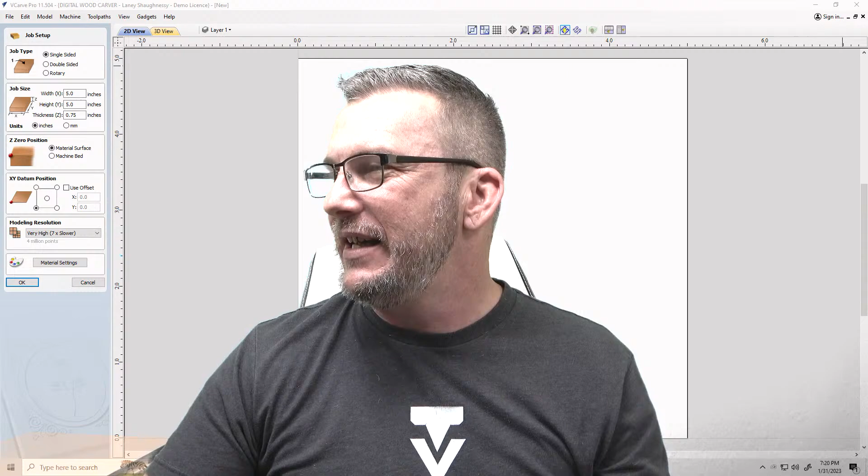So let's switch over to camera 2. Let's get me down in the bottom right hand corner, let's fly down here. Shoot, or left hand corner. Right? Left, yeah. No, left. Hopefully y'all can hear me, hopefully you're having a wonderful evening, and hopefully you get something out of tonight's class.

So right now I've got here on the screen, let's talk about the muse for this. So last week we did the 3 arts and crafts tables, how to kind of bring the vectors that were provided by Woodsmith in their CNC Base Camp episode. We brought in the vectors, and we talked about how to lay out the vectors and create all the fillets and things like that to create those tables.

And as I was looking at the Woodsmith CNC Base Camp, which is a good series, guys, check it out, it was referred to me by, is it Mike or Mark? Please correct me, it's been one of those days, forgive me. But it was referred to me by a customer, and when I was looking at the 3 tables, I saw this class, episode 6, this episode, on metal inlays.

Now the cool thing about the videos over there at Woodsmith and what they do is they're going to show a little bit of the CNC. They don't get into the design that much, but they do show some of the materials carving. And then they talk about the assembly of the project they're doing and how they worked with the metals and what they recommend, and things like that. It's good information.

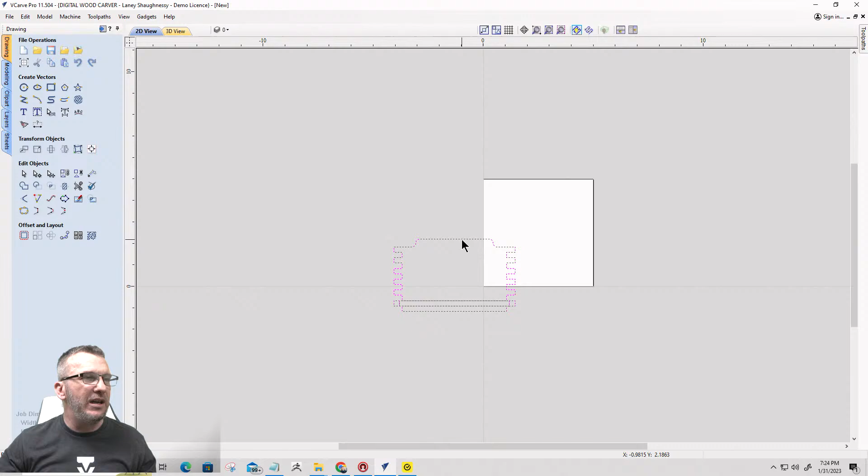But let's take a look at their file. So box 1, and I'm just going to move all their stuff over here. And let's import side 1 and 2. And then let's import their top 1. Oops, click the wrong button. Let's import their top 2.

And then let's import the floral inlay. And let's import the ginkgo leaves inlay, and the oak inlay, oak leaf. And then let's go ahead...

That's it. Let's go ahead and open up the PDF that you get as well, so you can see at least what the CNC Base Camp files provide you. You can see kind of what you get with those files, and they do a really great job of it. Let's bring this over onto the screen.

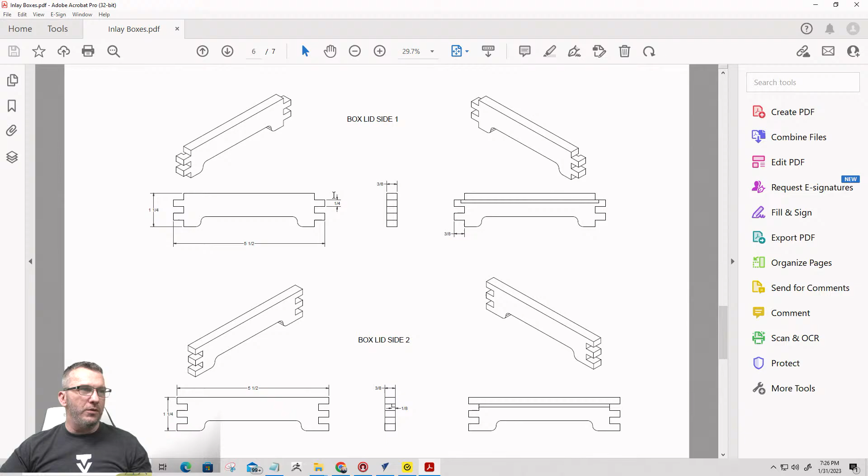And in the PDF, they show the box sides, for the different views, side 1 with their measurements, side 2 with the measurements, and the top lid 1 and 2 and the grooves and everything. They've done a nice job with the layout, the panels, the top and bottom panels. So they've done a really good job with this. And when it comes to the vectors and all...

On these finger joints and everything, where these joints are going to be fitting together, those inside cuts that we talked about in last week's class, we need to create those fillets. And they've got a nice way of hiding the fillets, in some ways.

But when it comes to finger joints, there's not much in the way of hiding it that we can get. When we go to do the joinery and all, I think because Woodsmith's got a combination, they work with hand tools and their CNC, they don't just let the CNC do it all. I have not watched the video, I'll be the first to admit that. It's been kind of a backed up time. None of the parts came in, none of the router bits, and I almost thought I wasn't doing this class. But I'm assuming that they've gone in and cleaned up the fingers and everything and squared them up.

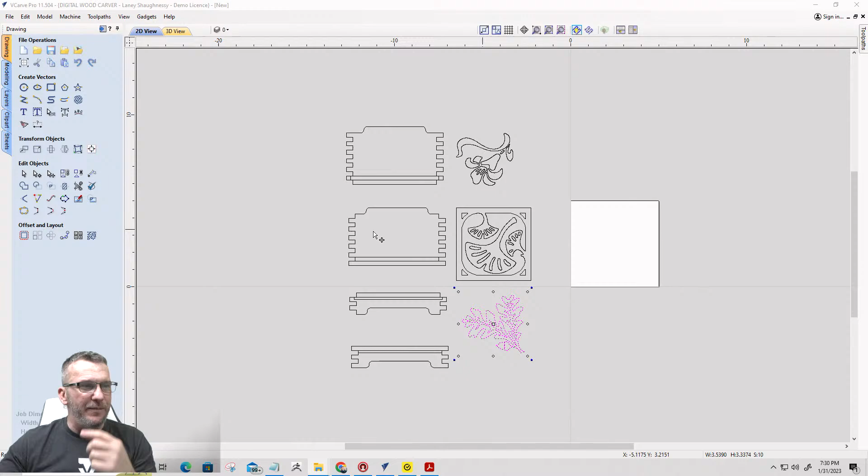Buckle up, ladies and gentlemen. We're going to be doing inlays, but if you want to see what they've cut and how they put their box together and their discussion on the box, watch episode 6. The link is in the description of this video, the link to their tutorial and these inlays. But we're going to start with our own project, because I don't want to just regurgitate what they're doing every week if I'm working off this. I want to give you the same tips and tutorials, but our focus is the inlays, and I want to put the inlays in a really nice box and take you through that.

Brooks Martin says he used a router to round over the fingers. Good. Okay, there you go.

All right, so watch that video on episode 6, and let's go through and create our inlays and our box and everything, and let's go from there.

So what I would like is, I've got a project set up here. We're going to go 5 1/4 by 5 1/4, basically kind of a 1 by 6, but I'm not going to just run down to Lowe's or Home Depot and do it in oak. I'd like to have a nice walnut box, round fitted lid box. I'd like to have a nice accent strip - maple, I kind of like the contrast of maple and everything. On the lid itself, we'll discuss the metal we're going to use for the inlay. I'm going to come out with a 5 1/4 by 5 1/4 diameter setup here, and 3/4 inches thick.

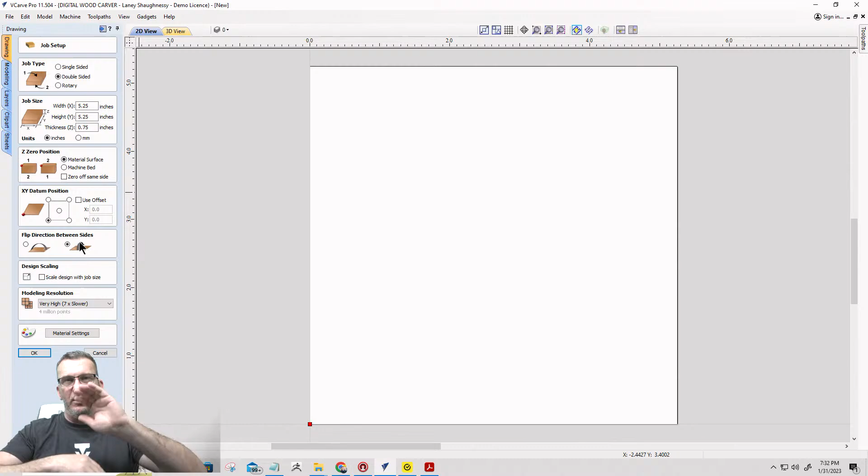I'm going to be working off the material surface, but it's going to be a two-sided job. Not all of the parts are two-sided, just the lid. The lid's going to be two-sided because I'm going to be carving the fitted pockets and the lip on the bottom side of the lid, and then the inlay on the top side of the lid. I am going to reference off the material surface for each side, and I'm going to start in the bottom left corner. When I flip my boards, I flip them along the y-axis - that's going to be my job setup.

Now the first thing I'm going to do is lay out these, and I'm going to move them to a brand new layer. So right click, move to layer, new layer, and I'm going to call this Woodsmith box. Click OK.

Don't be disappointed that I'm not working with that exact Woodsmith box with all the joinery. It's a very basic finger joint box. You can either clean up the inside of the fingers or do fillets. There's not really a lot to it. I want to take you through these as lessons, in when you import vectors and what needs to be cleaned up. Those inlays, there was nothing that really needed to be done with them. So don't be disappointed, because we've got a lot to go over and we're going to learn something in this class.

So we're going to start off with a 5-inch diameter circle. Notice on the screen I just put the mouse in the center of the board, and I've got smart snapping and geometry snapping on. So I got these crosshairs when I was at the center, showing me exactly where center was, and I could left click and drop that there.

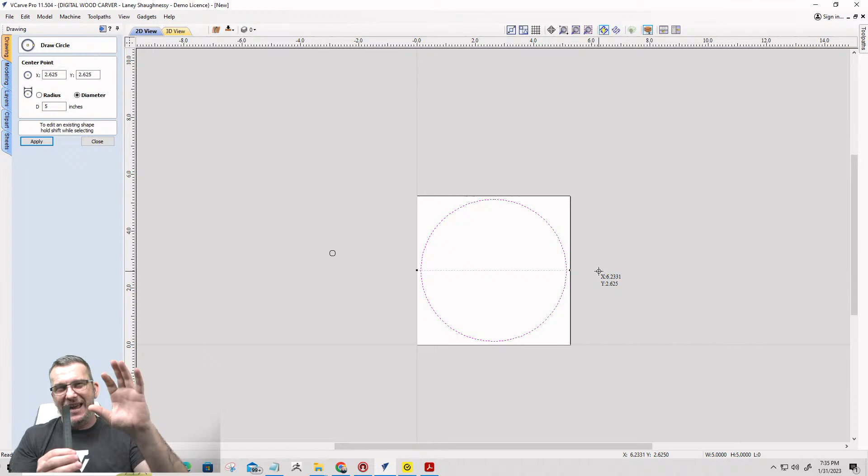So I want my box to be 5 inches in diameter. It's going to be kind of like a tubular round box with a fitted lid. I've got a little ruler here, and I'd like the box to have some depth to it, so it can store some stuff. I'd like the box itself to be between 3.5 and 4 inches deep.

And I would like an accent ring, if you will, in there of a different species of material. I'd like to have an accent ring and everything that I think would look good. So this is going to be kind of the layout of my box.

Now, on the box here, the inlay - I'm going to work my lid first, kind of get the lid and all the vectors laid out, and then we'll start creating the necessary vectors for the others. Because on the lid, the lip, inside my 5-inch diameter box, I'd like to have a pretty decent wall thickness.

Not too massive, but not too flimsy. So I'm going to offset inward using the offset tool, 3/8 of an inch. In a sense, my walls, once it gets pocketed out, are going to be around 3/8 of an inch thick - not too bulky, but not too thin. For me, I think 3/8 is a good number.

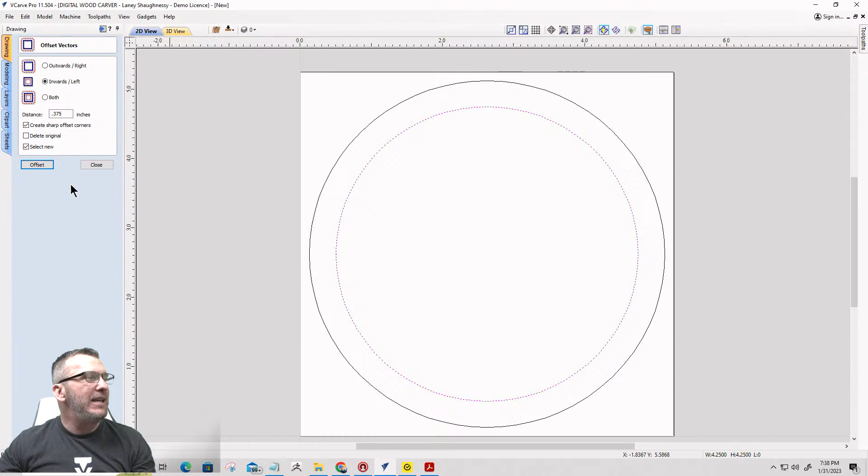So we're going to go 3/8 of an inch on our wall there, and now I'm going to import the vectors that I want to use for the lid. And I've got some vectors.

I've got some vectors here called floral pattern vectors. It was from seeklogo.com. If I open this up, we have these patterns that I liked. I'm going to move them off to the side and we'll focus in on them. I know it's hard to see with that dark gray background, but...

I've got these patterns that I want to choose from, and for my round lid box I've got multiple ones and things. The one pattern I want to work with tonight is this one here on the bottom right hand corner. Now these are already vectors, and they were free from online at seeklogo.com. They have a bunch of different stuff you can type in and search for vectors, and I basically just typed in floral pattern vectors.

This was one of the many options, right? And I like the different patterns because any one of these would fit very well on a rounded lid box. So the aesthetics and everything, any one of these would fit on the rounded lid box.

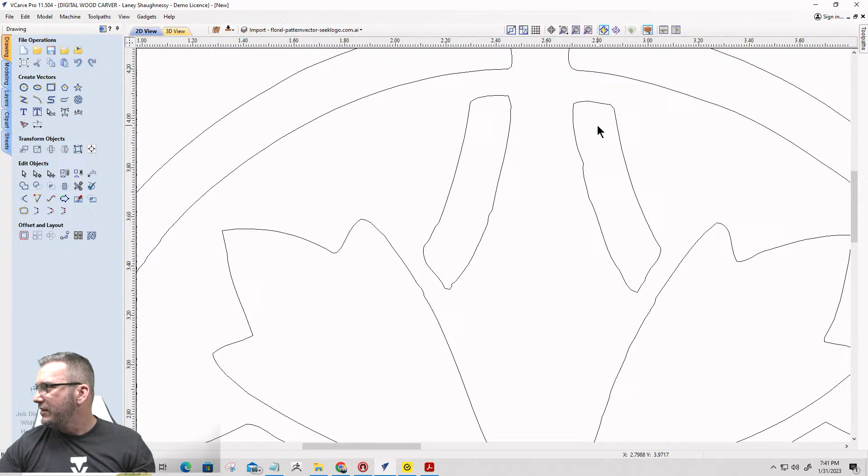If we zoom in on this, and I'm going to really get up close and personal, but if we start to really inspect the lines, they are not by any means the best looking of vectors. There's not really anything smooth or clean about them. They've all got issues and things like that, humps and bumps and all that wonderful jazz.

Hey, Big Daddy Fish, how you doing, buddy?

So our first lesson is we're going to clean these up, recreate what we need to recreate and things like that. And I'm going to show you some ways that we can do that. Cool beans. All right, so let's look at the first things.

First, let's look at this main circle out here. The first thing I want to do is take a measuring tool, a measurement, based on my current size right here where I'm at. If I measure, I'm going to just grab a point somewhere and measure best of my ability straight down, just to get kind of what my distance is, you know, 0.1567, roughly around there.

Now, what I want to do is recreate this, if you will. So I'm going to add a new layer. This is where layers comes in really handy. Since my vectors that are currently here right now, I don't need to change or set them or do anything with them just yet. In just a second, I'm going to lock my main layer here so that I can't move the vectors or disturb them in any way while I'm working on the new stuff.

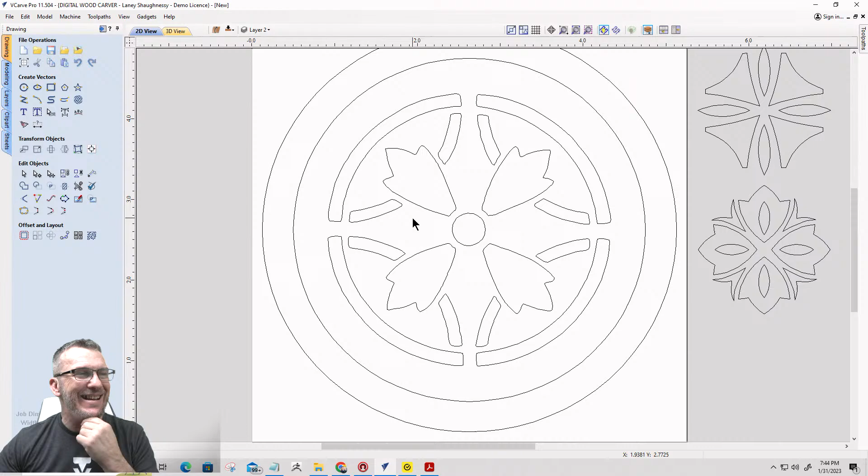But that way I can take this object here, and I'm going to pretty much start from scratch, if you will. I'm going to lock my main layer. What that means is, let me get everything on my main layer, let me lock that.

I can't select anything on that layer—it's kind of protected from me moving it. So I'm going to be working on layer 2.

The first thing I'm going to do is open up my draw circle tool. Hang with me, guys and girls, you're going to like this, it's a good lesson. I'm going to take my draw circle tool and snap straight to the center of my project, since everything is centered, and drag a box out to the main circle.

Now if we look here at the line I dragged that to, you can see the original pattern just wasn't symmetrical—there wasn't nothing straight about it, right? So this is why I'm kind of recreating it, if you will.

Now, remember I took that measurement earlier—it was 0.1567 and all that stuff. I'm going to do an offset of my circle. Hopefully you can see that red circle there. I'm going to offset the circle inward by 0.1567, kind of bringing it in that same distance. I want to keep the same kind of feel for it, but bring that in. All right, cool beans.

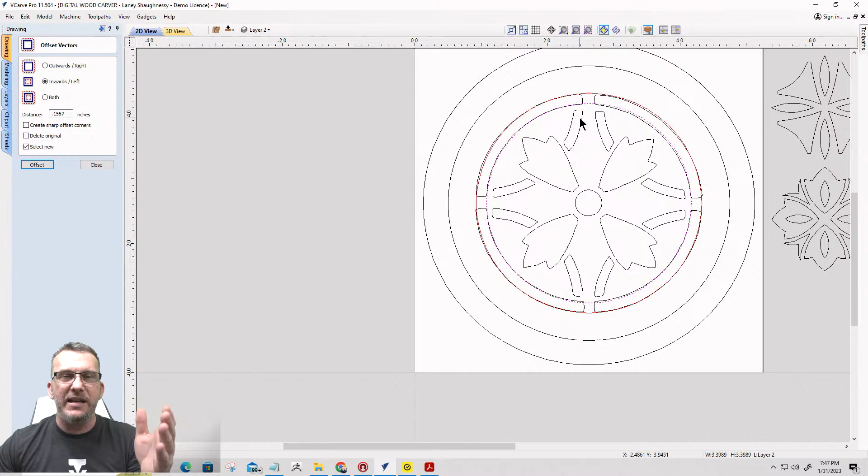But I want to create the same feel, if you will, using rectangles. So I'm going to come in here, use a rectangle, and draw it all the way straight down here with square corners. Corners don't matter because we're going to be using the scissors and trimming and all that stuff.

And I'm going to hold my shift key down and size this down to roughly where it's right about here—just get it about the same size, that same gap, if you will.

Now I'm going to make sure that rectangle is centered left to right. I'll go to the alignment tool and make sure it's centered left and right—it was off just a little bit. So now it's centered, and then I'm going to hit copy and paste.

So copy and paste, Control C, Control V, if that's your thing—keyboard shortcuts and all that stuff. Currently the new copy of that rectangle is the one selected, so I can hit the number 9 key if I want to go clockwise, or the number 0 key if I want to go counterclockwise.

Let me say that again: I can hit the number 0 key to go clockwise, and the number 9 key to go counterclockwise. I'm going to rotate that part—hitting the number 0 key twice. That's going to turn the copy 90 degrees.

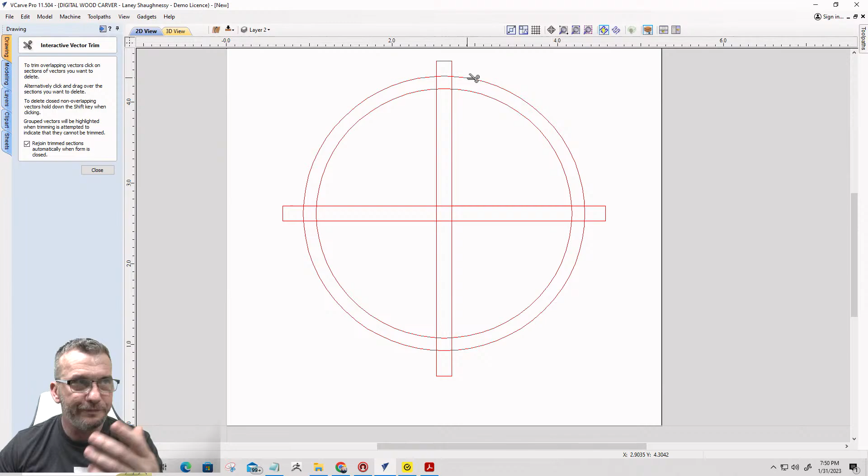I'm just going to come in and start trimming. I'm going to trim there and there, come over here, trim, trim, there and there, down here, trim, trim, and side to side. Trim, trim, side to side. And so what I'm left with is essentially that shape, if you will.

Now, each one of those shapes originally, the corners of the part were nice and filleted. We could do a couple of things with the ends here. In node editing mode, we could turn that into an arc and pull it out so it's kind of a rounded end, but I don't want to do that.

I just want to put a nice little fillet on there, give it a nice little rounded edge. So I'm going to go to the fillet tool and see what a 1/8 inch normal fillet looks like. Way too much, way too much. Let's go 32nd, 0.03125. Nice, so a 32nd.

And I'm just going to go through and add that little fillet to all of the sharp corners here. I'm doing this now because why draw what you can copy and all that good stuff. We'll talk about it in just a minute. So, nice little fillet, normal fillet, right?

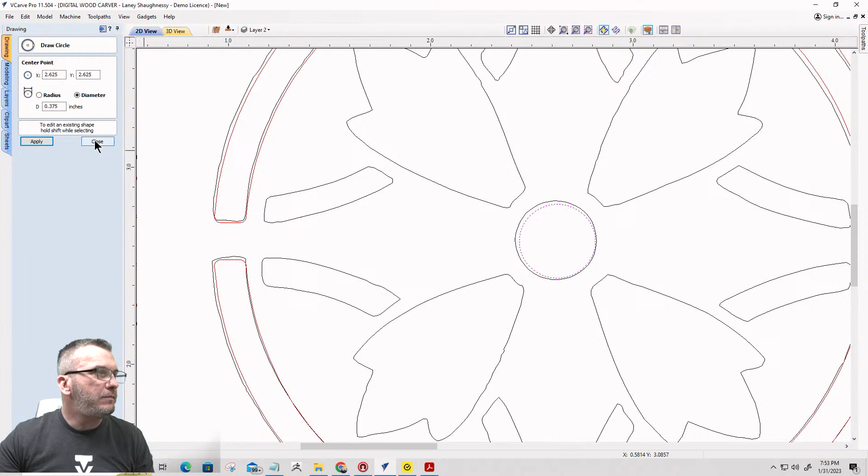Is that a word? Is that a technical term, cattywampus? But it's not centered itself, so I don't care about that. My circle is centered. I just want to get round about the same size, and it's showing about 0.385, and I'm just going to go 0.375, about 3/8 there, and it'll be good. And again, I can't select anything else here, so I'm just going to leave that be.

Now, on these remaining parts here, these arcs and stuff, and the leaves, we'll talk about the leaves last. But are you guys doing okay?

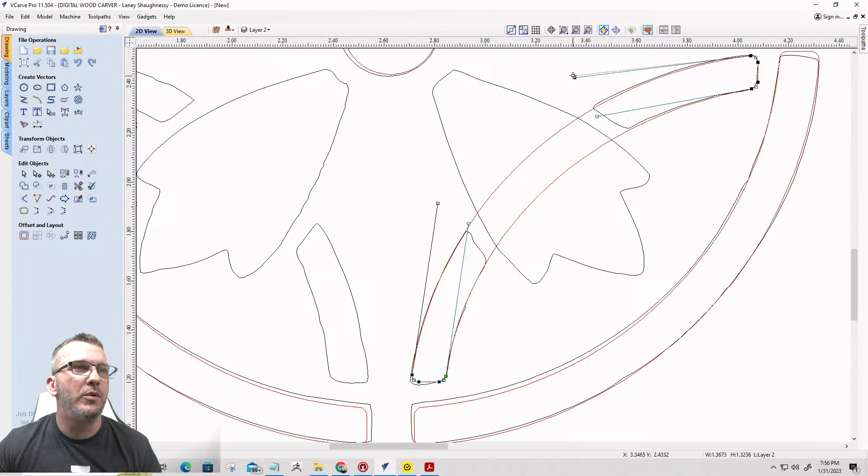I could come over here and move those over to get them somewhat in line. And then take these anchors and pull this down to there and pull that down to there, and I have that shape, or a very close simulation of it. Let me get this one pulled up just a little bit like that. So I have that shape and all.

So that's one way. We could have done that. No big deal. But thank you for that. Thanks, Roger. I appreciate you, Roger. All right.

So that's one way to create that shape. Now, second way, way number two, let's go with our arc tool. I'm going to click, pick a spot here, come all the way over and around about in that same area, click a spot.

And then I'm going to pull this up to a nice kind of shape that pretty much simulates that shape there. Okay, we with me? You with me? All right.

And then I'm going to offset that inward. If I go into node editing mode, by the way, left is here, so I would actually be on the inside left. So I'm going to be going inward, offsetting inward. And outside right would go to the right here during the offset. So I want to offset inward that same distance.

It's not quite that 0.1567 distance, but hey, we're recreating it, that's okay. I can back it off a little bit, so I'm going to undo that and I'll just go 150, and I'm pretty darn close there.

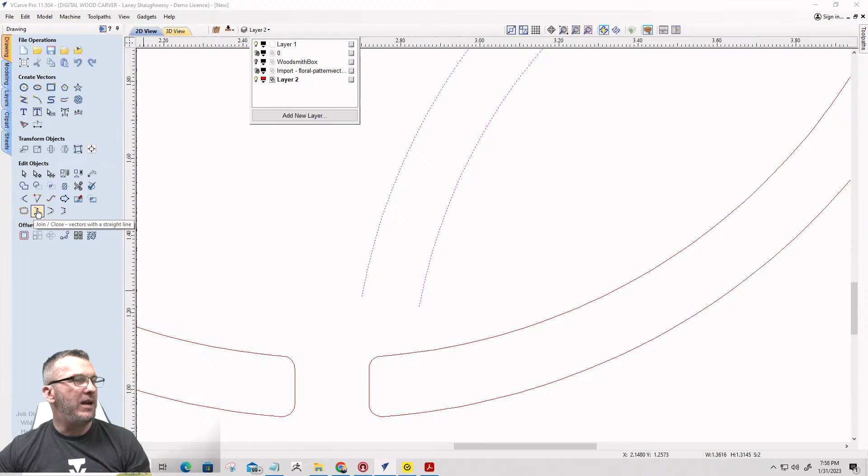And now I'm going to select both of those shapes and join them with a straight line. Let's turn off this layer so you can see what's going on here. So I've got this shape here, I'm going to join it with a straight line. Once, twice, click it twice so it joins on both sides.

And my fillet tool, that 0.03125, I'm still going to use the same fillet, and I'm going to throw that in there. Whoa, now notice when it did that - wow, and everything. That's because when I joined here on this join, it's got a bit of a funk going on there.

Let me do this side. There we go. Let me zoom in on this corner here, get right there, and that way it pulls up. When I was out further, I was kind of more hitting, instead of right on the corner, hitting the node over here, and it was just doing something wackadoo.

Undo, Control Z, and go through to try to figure out if it's an open vector or what it is. But in this case, what I had to do is zoom in to get really right on - let me undo this, Control Z - to get really right on that corner. I was over here and everything, and when I did that, it was throwing everything wackadoo.

So make sure you get right on that corner, get that little check mark and everything to get that radius that we want. Okay, cool beans.

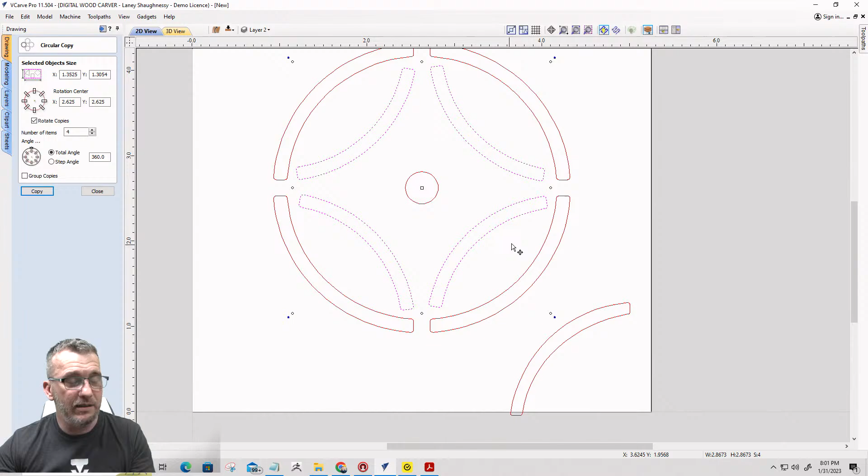And hey, that's good. So we can undo that. Come in here, what if we go into our layout lines? Let me snap to the end of this, and if I were to rotate, I don't need my layout lines for this. These are a little short, no big deal.

Let me get a measurement. Length from here to there, 0.0893, and from there to there, 0.1232. So I need to extend 0.0893.

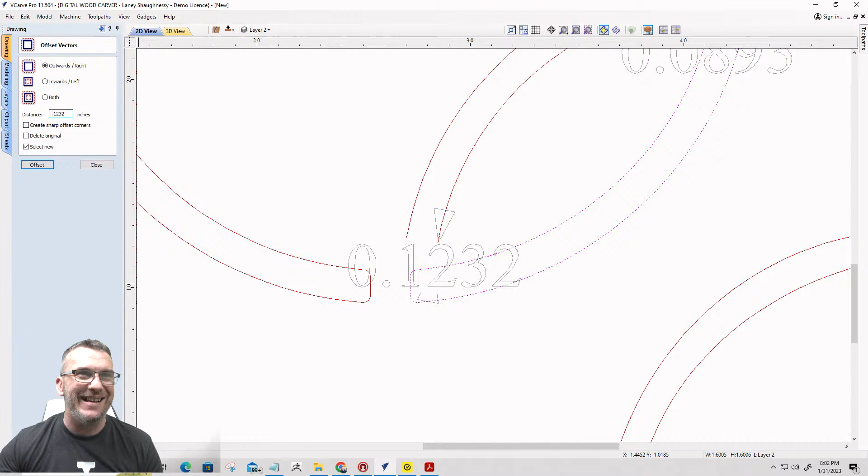Let's do an offset. Let me put my math number back there. I'm going to do an offset of this part, offset outward 0.1232 minus 0.0893 equals, and offset that to there. And then I'm going to take my extend tool and extend that line to there.

And if I were to rotate, bear with me just a second, I'm going to rotate this part. Give me just a moment. I actually want to go a little bit wider than that by row, so let's offset that outward. I'm going to go 3/8, 0.375. Whoa, that's way too much. Give me a second. Let's go 0.125. That's good. All right.

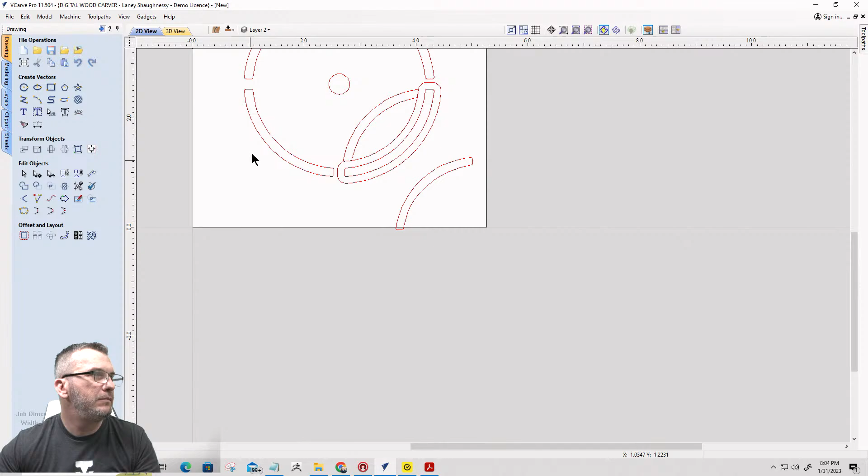Alrighty, Aphrodite. All right, let's go in with our scissors and trim, extend, delete, join with a straight line, 1, 2, fillet tool, 1, 2, 3, 4. Wrap it around the 0, 0. Okay. Better? Is that good?

Good. Cool. All right. Now, what James is throwing out there in the chat is he's saying take a circle from the center, and I could bring that circle out to the edges. Here, let me snap to the edges. I could bring the circle out to the edges to keep my symmetry.

So let's do this, right? Trim. So we can come in here, size this circle down just a little bit, take our scissors, trim that away, that away, that away, that away. Trim that, and that. That, and that. And that, and that, and that.

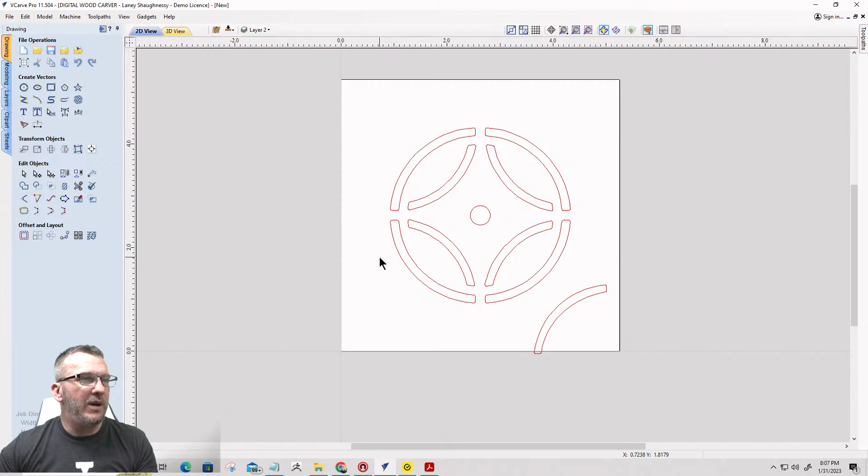All right, all these little tips, lots of ways of doing things, you know, and there we go. So we still copied around. Done deal. Okay, now let's turn on our layer again.

Okay, now we have these kind of leaf patterns, if you will. And from these leaf patterns, our little shapes are trimmed back away from that. I'll show you how to do that too, it's just an offset and all that good stuff.

Now, your little leaf shape, whatever you want it to be, can be anything that you want. For me, when I'm approaching design, and if you've watched any of my classes in the past, especially the Maltese cross, I look at everything as what shape would I start out with to create the shape I want. In this case, I'm going to start with a rectangle, and from that rectangle, with some node editing, I'm going to end up with this kind of floral pattern. It doesn't have to be exact, but close. Excuse me, I had the hiccups for a second.

All right, so what I want to do with this is use the circle tool. Remember that back layer I keep turning on and off, it's locked, so I can't mess anything up with it, and I don't care if I mess it up. It's not that pretty, that's why we're redrawing it. I just want you guys to see it's not the end of the world if you can't find the perfect graphic. Get close enough, spend a little time and clean it up. We're going to have a really nice inlay graphic that's going to look great as metal. We'll talk about the metal in just a second.

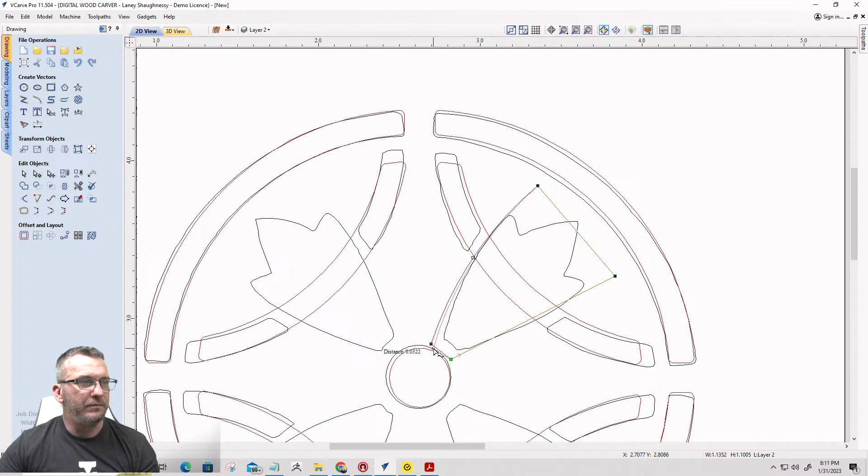So in node editing, I can take a span and turn it to a Bezier curve, or turn it to an arc, whatever the situation calls for. In this case, I'm going to turn it into an arc and pull that arc back. It likes to shoot out into no man's land when you turn something into an arc, and you just got to tame it, bring it back in. But I'm just going to pull this out, kind of get that arc shape going on here.

Now I'm going to show you a cool trick. I'm going to kind of focus on one side of this, again for symmetry, and then I'm actually going to mirror that over to do the other side, so it's a symmetrical part. Or if you don't want it to be symmetrical, you want some differences, it can do that as well. But I'm going to focus my attention on this top half here.

So from here, I'm going to pull this node down to here. I'm going to insert another point here, right click and insert a point. I'm going to pull that there and turn this into a bit of an arc, not that dramatic, and pull that back.

Then I'm going to come over here and put in a point and pull that down to here. I don't care, everything is kind of straight lines right now, I'll go in and smooth everything out in just a moment. I'll show you how to do that.

I'm going to come in here, grab, insert a point and pull that up to here. And then from there, right click and delete the span. Hold on, let's try that again, delete the span. That separates it from here. And I'm also going to delete the span down here, so I'm only working with this half. So we'll get rid of this line for right now.

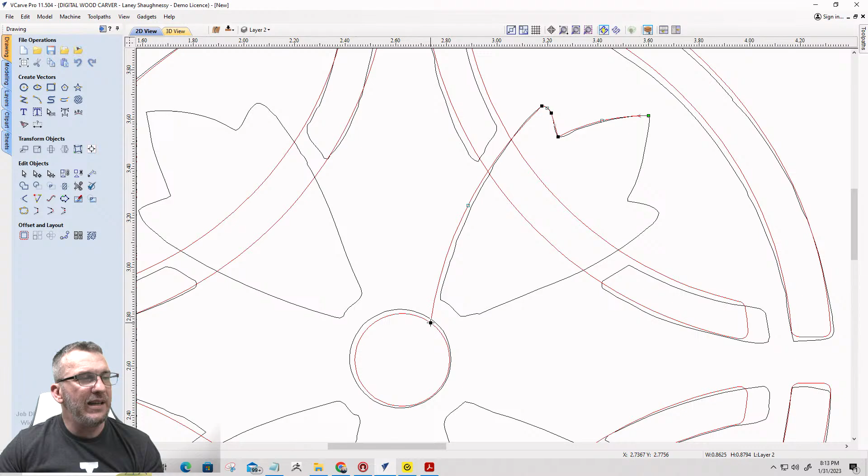And again, not so dramatic at all. I'm leaving this intentionally long down here, but I want to kind of start. Again, we're working with bad lines, cleaning them up, so don't try to match them exactly. That's not the goal. The goal is to make it better, right? So I just want a nice arc, a nice flow to this leaf and everything. Now right here, got kind of a bit of a hard spot.

I can select these nodes and hit the letter S on the keyboard, and I believe, is it S? Hold on a second. What is my keyboard shortcut? Bear with me for a second. It is S, the letter S, but it is not... why it's not letting me deal with that.

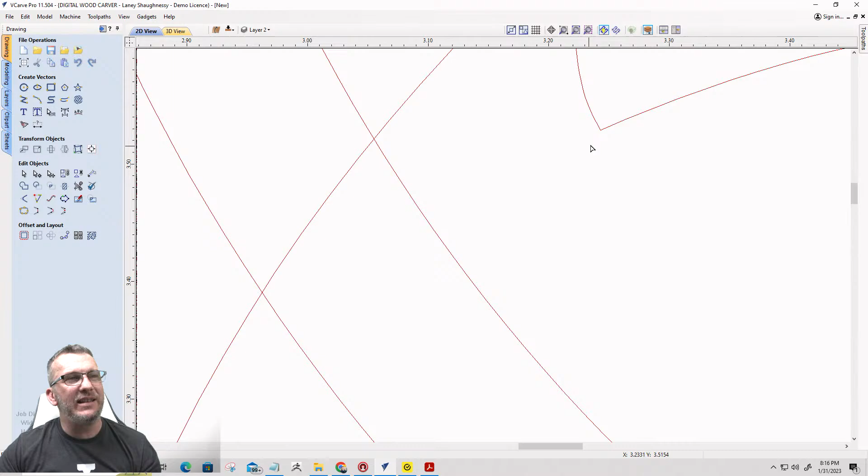But I can hit, when I have the nodes and everything, generally I can select all the nodes and hit the letter S on the keyboard and it'll smooth them out, if I wanted to do them all at one time, which it just did. I don't want to do them all at one time. I want to do this one a little bit, I want to smooth that a little bit. Don't want it to be so, oops, I hate when I do that. I don't want it to be too thin here, so I want to give it a little bit of thickness. Okay, all right, so I just want a nice little flow, if you will.

Okay, now I'm going to come in here and I want to mirror it, right? But how do I want to mirror it? Well, I want to mirror it about a line. Are you guys and girls still with me? Wake up. All right, cool beans. We're going to start from the center, and I'm going to draw a line, you know, 45 degrees.

And I'm going to take this shape, I'm going to select that shape, I'm going to select this line, and then I'm going to go into the mirror tool. And I'm going to click the button that says create a mirrored copy, and then flip about line. Right? Okay, create that symmetrical half in there and everything.

Now that I've done that, I can go ahead and get rid of this. And up here, these two parts, I'm going to join them with a smooth curve just to finish off that little point. It's not the prettiest point in the world, but it will... that looks worse. Bear with me. There we go.

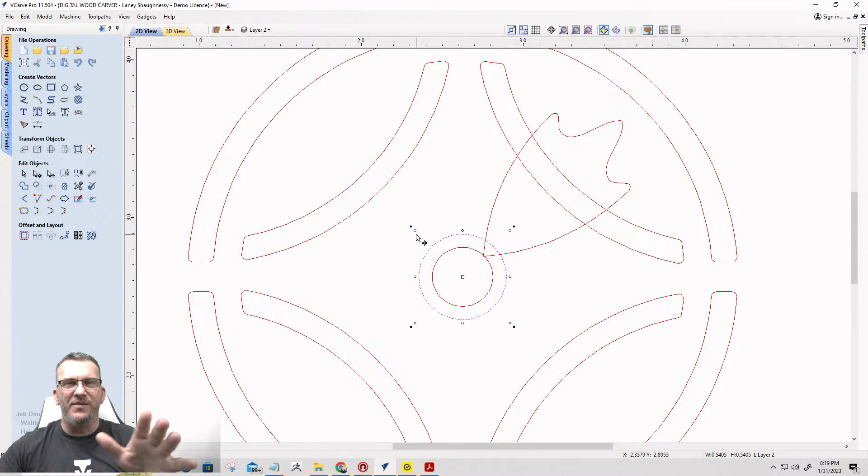And don't let go like I just did. Don't let go prematurely. Hold that control and shift and drag that out. Let go of that mouse first before you let go of your control and shift button. But I'm just doing kind of an offset, no particular rhyme or reason, just add a little offset there. And I'm also going to do an offset of this guy. So I'm going to offset outward, and let's see what an 1/8 of an inch offset looks like. That is a little bit too much for me. Let's go a 1/16, half of that.

I'm going to be happy with a 1/16 inch offset. Now, I'm going to take this shape, just that one, and rotate it around 4 times using the circle copy tool. I want to copy around the center of my part 4 times, and copy that around. With me? Cool beans.

Here, and here, I can manually do this. I'm going to show you the way to automatically do it with the trim tool, but you can also manually do it with the scissors. I'll show you both ways, starting with the trim tool.

So I can select this shape, this, and this, and group them together as one, right? And I can select... let's not do that, let's do one at a time. I can do this shape and this shape, we're going to do them one at a time.

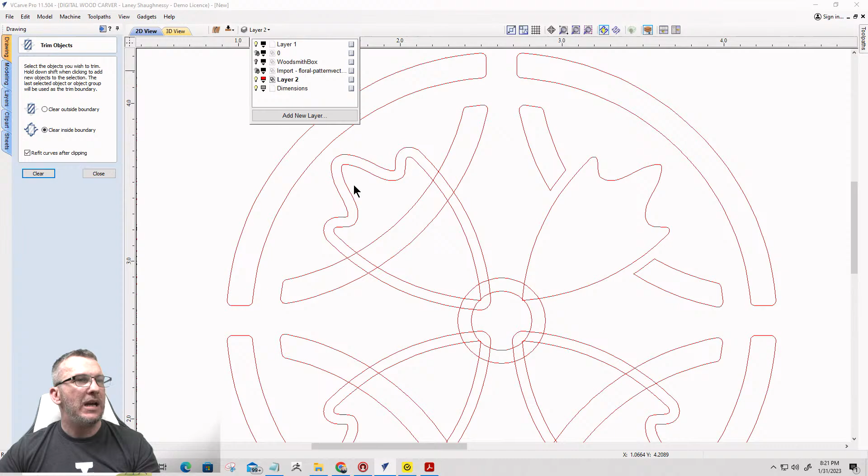Here, select what you want to trim, the boundary you want to trim last, and clear inside that boundary. And then, of course, we don't need the boundary anymore. So that's using the trim tool.

I can also obtain that same thing by using the scissor tool. With the scissor tool, I can come in here and trim, over here trim, and then get rid of the stuff that I don't want. Same vibe, right? Once again, trim away what I don't want.

That kind of thing. Just make sure that you get rid of, if you're using your manual trim tool, your scissors, get rid of everything that doesn't belong. Okay? Good, we good there?

All right, now in here I will use the trim tool. What I'd like to do is just cut off these points here and get that around. I want to create that little arc right there. Get that tip out of there too.

Trim that away. Get rid of that tip. Trim those 2 lines and the big line in between. Get rid of that tip. Get rid of this line and that line and those 2 edges.

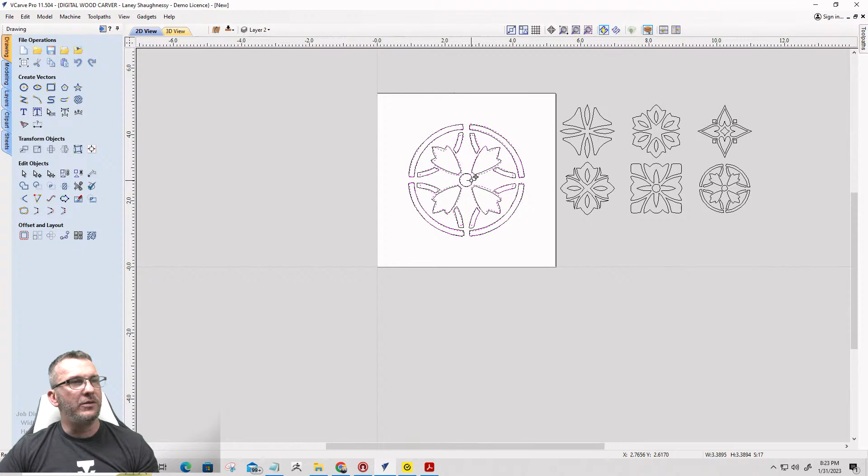I'm going to take our... remember I can't select the original, but I can select what I just created. If we look at our original versus what we just redrew, much cleaner lines and smoother, all that good stuff. The red is the one we just drew.

So not too difficult. Our leaves don't look 100% the same, but that's fine. I've got a little bit more flow in my leaves, a little bit more curve in my little flowers versus these hard cornered lines and stuff. But that's what we just created.

Cool beans. Okay, let's go ahead and get past all that stuff. Lord have mercy. All right, so now we have our new inlay.

Don't both spans around nodes have to be Béziers to smooth? I don't know if that's the case. What someone's asking is, on a span, if I go into node editing mode, I have a straight line here, straight line, and it allows me to smooth that point there. It turns that into a Bézier curve on both sides when I smooth that point. So to answer the question the way you asked it: do both spans around the nodes have to be Bezier curves? No, they turn into Bezier curves. When you're smoothing, that's what you're creating. You're not creating arcs, you're creating Bezier curves. But they don't have to be that way to begin with.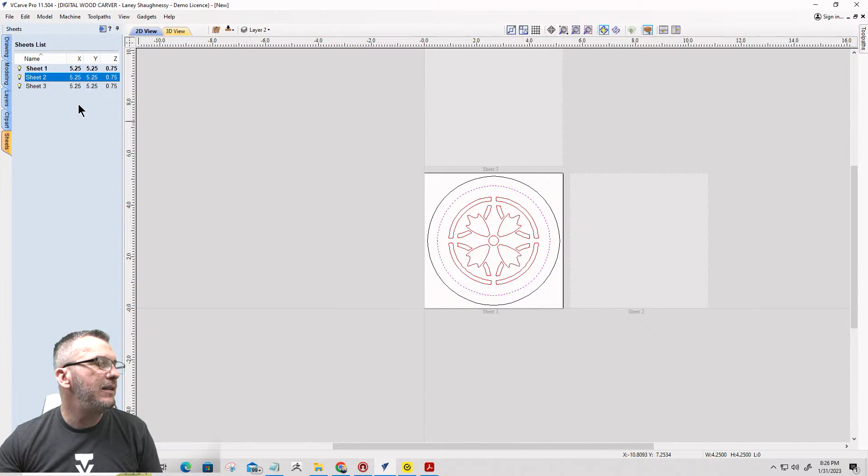Now I'm going to set up multiple sheets here. I'm going to set up a new sheet, sheet 2 and sheet 3. Sheet 2 is going to be a 1/4 inch thick. I think a 1/4 inch will look good, and it's going to be my accent piece of wood.

So I'm going to cut out that accent piece of wood that's going to get glued. You know, I'm going to have my base. I'm going to have that accent piece of wood ring, the ring. Then the top, not the top, not the lid, but the top of that, they're going to be glued together. So I have that nice accent piece and everything.

And then I'm going to have the fitted lid, right? So I think the ring, I think it's going to be a 1/4 inch. Yeah, okay.

Basically, let's come back into here. These two shapes here, they're going to get copied to sheet 2, and they're going to get copied to sheet 3.

And I'm going to designate sheet 3. That's going to be my bottom, the actual base of the box, right? The bottom part, right? So I'm going to rename that to the box bottom.

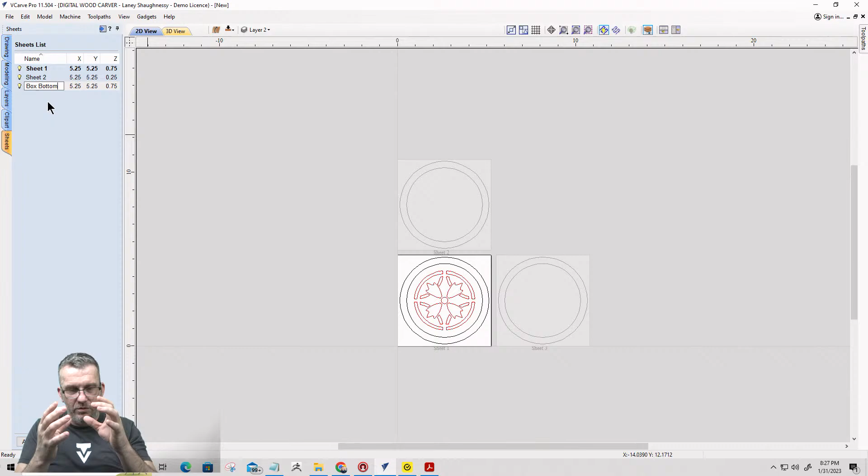I need one more sheet. One more sheet, so I'm going to add a new sheet. This is going to be my sheet 1, it's going to be my lid. So we'll rename that to lid.

Sheet 2 is going to be my accent ring. Sheet 3 will be renamed to my upper tier, upper level, upper part of the box. I'll just call it upper tier. That's fine. Yeah, I'll know what it is.

Now on my upper tier, so 3/4. Then I'm going to have an accent ring, and then I'm going to have another piece on top of that, and then the lid on top of that. Now, the other piece on top of the accent ring, do I want it to also be 3/4 so that way my ring is somewhat in the middle of the box? I think that would probably look more aesthetic.

I kind of almost want the ring to be a little bit higher, so I'm thinking about the upper tier being a 1/2 inch thick piece of material. Let's do that. So the upper tier is going to be a 1/2 inch thick.

And don't worry, ladies and gentlemen, if you don't have planers or anything like that, your CNC does surfacing. But also on your cut, you can surface or pocket down, in this case, a 1/4 inch, and then cut your parts out, right? And it would be a 1/2 inch piece when it's all said and done.

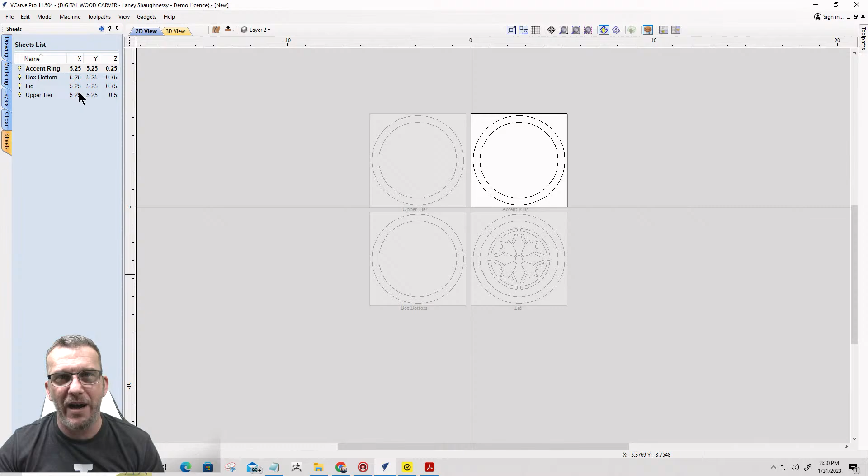Okay, very simple pocket cut. Bottom of the box is going to be our pocket cut here, and we're going to go pocket. I'm going to, it's a 3/4 inch piece of material. I'm going to pocket down a 1/2 inch and leave the bottom a 1/4 inch thick, right? So 0.5, and I'm going to use a 1/4 inch end mill.

Do it as an offset, be a nice clean cut and everything. I don't necessarily need a bowl and tray bit or anything like that. I don't necessarily need the rounded edges at the bottom of the box. All this is just going to be a container, you know, a container with a lid on it, right?

And I'm looking around like I have something that would be similar, but it's not like a bowl or tray. I don't need a special bowl and tray bit or any of that stuff. I'm just going to have that pocketed out. So this is going to be my bottom pocket, 0.25 end mill.

Okay, all right, we're going to do the lid last because it's a 2-sided project and everything. So, and it doesn't take long. We're about to get there. Tonight's not going to be a very long class.

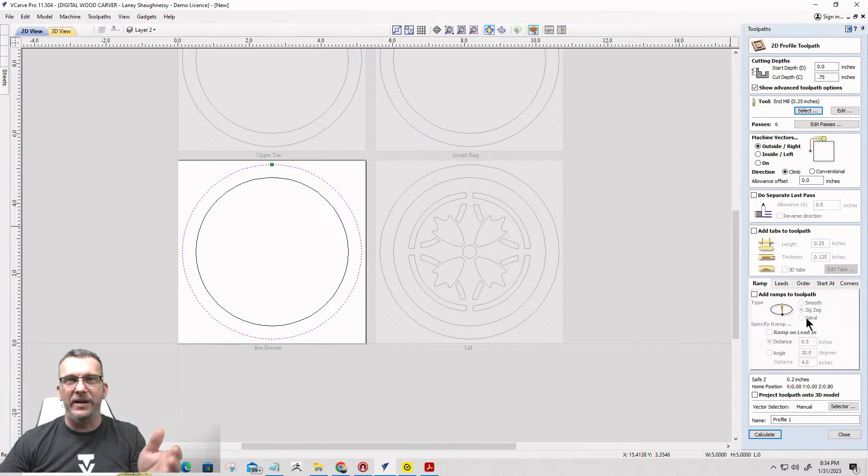Don't have a feed rate of like 100 inches a minute with a plunge rate of 10 inches a minute. It doesn't work, because then it'll stop and stop. It needs to be a nice, smooth funnel, if you will. So have your feed rate and your plunge rate the same thing, and it's going to drop slowly as it goes around until the part's cut out.

I'm not going to do any kind of ramp right now. This is just a simple cut for me, so we're going to go profile, cut out.

And I'm going to put the word bottom on there, even though the sheet's named bottom. It's also a 0.25 end mill, so those two toolpaths can get saved together, and they can get cut out. So that's going to be my bottom ring.

Now let's go back over to the sheets real quick and let's change that. We're going to rename that upper tier, and we're going to call it our upper ring. Thank you again for that. Upper ring - that makes sense because I have an accent ring there.

And then the bottom, it's the box bottom, but it's also the bottom ring - it's not really a ring because it's not through, so we'll leave it at box bottom. Very good. Now, this will be our box bottom.

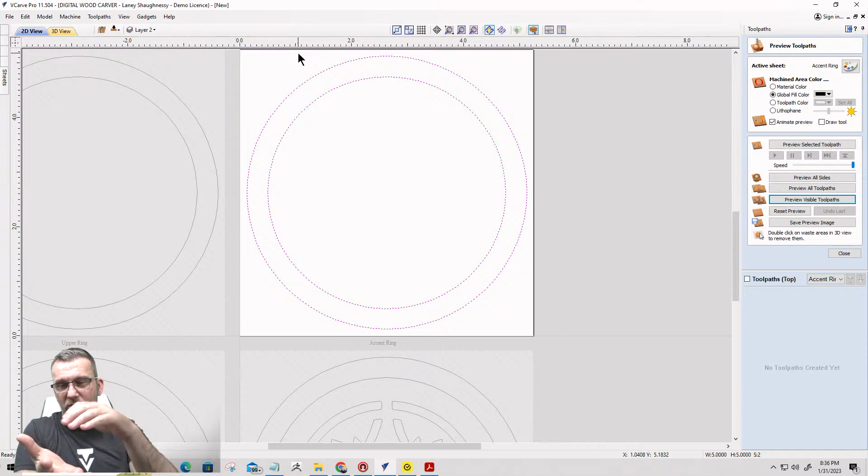And I'm using 2-sided tape, so the software is pretty smart. Now, I did a pocket cut because that one wasn't cutting all the way through. This little 1/4 inch ring is cutting all the way through.

Now, I have an outside vector and an inside vector. I'm going to do a profile cut on both of these vectors. It's only 1/4 inch thick, so I'm cutting 1/4 inch deep, and I'm cutting on the outside right of the line. I'm choosing outside right because that's what I need the bit to cut on the outside right of this profile. But the software is smart.

It knows that there's also an inside ring, a vector inside of a vector. Therefore, it's going to reverse that cut for the inside vector and cut on the inside of the line. So I don't have to create 2 separate toolpaths, one for the outside and one for the inside, and I don't have to choose 2 different options. I just need one toolpath, profile cut outside right, and for the inside vector it'll cut it but reverse that cut and do an inside cut. So when we calculate this toolpath, this will be my accent ring.

Profile cut. Let me get rid of these spaces, backspace, and 0.25 end mill, 0.25 end mill.

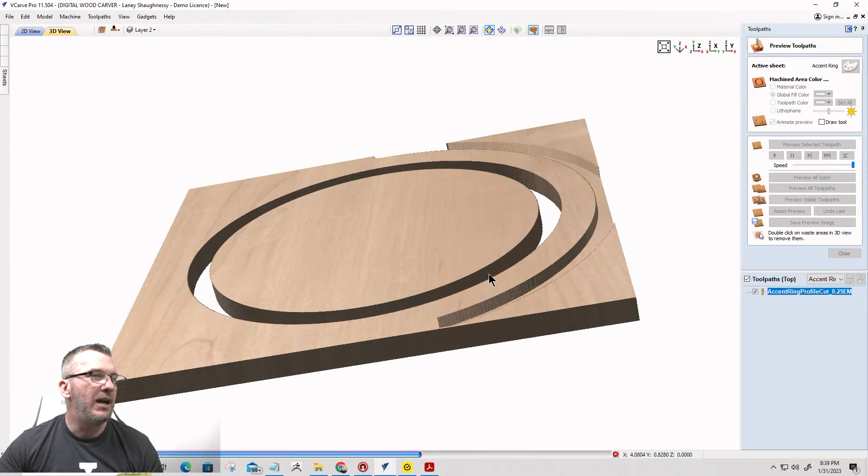If we go into the 3D view here, profile cut, preview the visible toolpath, which is right there. And that's going to just cut out. And again, I have double sided tape, so I'm not worried about tabs, and I don't want to be dealing with tabs. And also simple box, but it's going to be a nice looking little box, a nice little heirloom box.

Who knows, right? But that's going to be my accent ring. It's going to be maple, and I'm going to have a really dark walnut, and it's just going to be a nice accent ring. Now, you really want to get fancy, right?

We're talking about metal inlays, okay? What if I wanted a nice thin metal, it's going to be 22 gauge. We'll talk about that. And while I'm mentioning metal, let's look at the resource. One of the resources for the sheet metal, the metal goods, is Rio Grande, riogrande.com.

It's a jewelry supply house. And the sheet goods they have are silver, gold filled sheets, copper, brass. They have other metals, some unique, other metals and stuff. Then they have strips, and then they have foils, foil leaf and everything. I ordered some silver sheet, copper, and brass for these projects.

And I believe that my box is going to have, I'm going to do the silver on the lid. But if we open this up, riogrande.com, okay, that's one of the resources. They have the sterling silver, they have different types of silver.

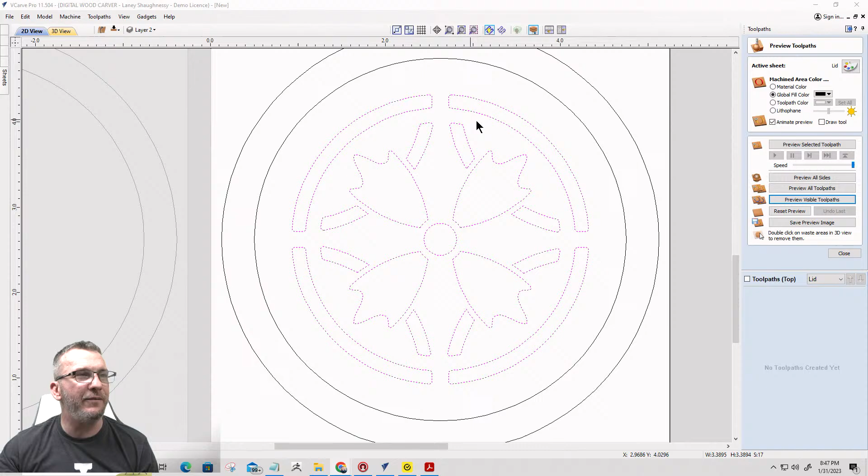At first, I wanted to do the silver leaves and the flowers, and I was thinking something other than, you know, brass, because it was a little gold. It wasn't gold, but it's a little brighter on the walnut. Have the brass, have that two-tone, that would look really nice. But I think I'm going to just go with the whole thing as one on this.

Now let's talk bits really quickly and everything. But that accent ring that we just cut out, I'm using maple, right? But it could very well be that piece of metal, right? All right, so let's talk about some things that we're going to need for this project.

Okie dokie, okie dokie. All right, so let's come over here. The first thing that we're going to need most definitely is some MDF scrap. The second thing that we're going to need is some Titebond hide glue. Run down to Lowe's, I mentioned it to you in the class 2 weeks ago. But get yourself some hide glue. Hide glue has a reversible bond, and the bond kind of dissolves with water, right?

So on the metal, to make it easier to cut and easier to handle, we're going to take our metal sheets and glue them to an MDF background. That way when we cut, that metal sheet is secured from bending, moving, and flexing, so our inlay gets cut out really nicely. And we're going to glue that metal sheet to that MDF with the hide glue. Okay, it's going to create a nice bond.

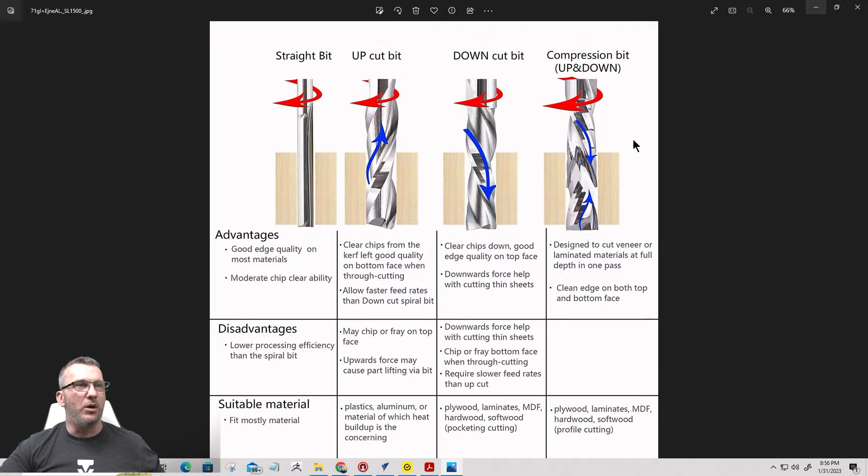So anyway, we're going to be dealing with upcut spiral bits, our O-flute bit and our 2-flute bit. That 2-flute bit was a speed tool bit available on Amazon, I think it's the SL1500, but it's a 1/4 inch shank, 1/16 inch cutting diameter, 1/4 inch cutting length. You want that short length for when you're working with metals and stuff.

Okay, cool. So for our bits, I ordered one of each of those, but on the speed tool one, I did order 2 of those because I wasn't quite sure, even though it is good for aluminum, metal, and stuff, the 2-flute upcut spiral, just in case I'd break a bit or whatever.

But here's the deal: your pass steps, you're only cutting 0.02 per pass. Now that's still enough because the material itself is only 0.028, so you're still going to cut all the way through in 2 passes through that thin metal material.

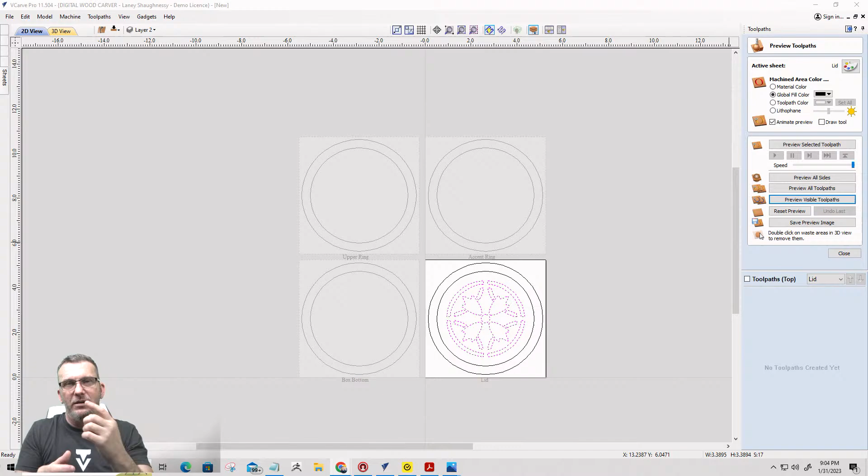On whatever shank we have out of the bit, it's just too weak, we want a nice thick foundation. So if your router can accept a 1/4 inch shank, absolutely unequivocally go with 1/4 inch shank. But if you're working with a router that has a small spindle type and can only accept 1/8 inch bits, then you can work with that too, just control your feeds and speeds, especially your feed rate. We got shallow cuts, always shallow cuts, right? We're only going about 20 thousandths of an inch per pass, and even though our material is only 0.028, so it's only going to be 2 passes anyway. But if we were doing something thicker, then shallow passes always.

Ace is the place, yeah exactly. And Brooks, yep, $47.55 at Tools Today. Thank you very much.

Yeah Jeff, copper might age to a really nice patina. Troy's like, I better stick with silver paint.

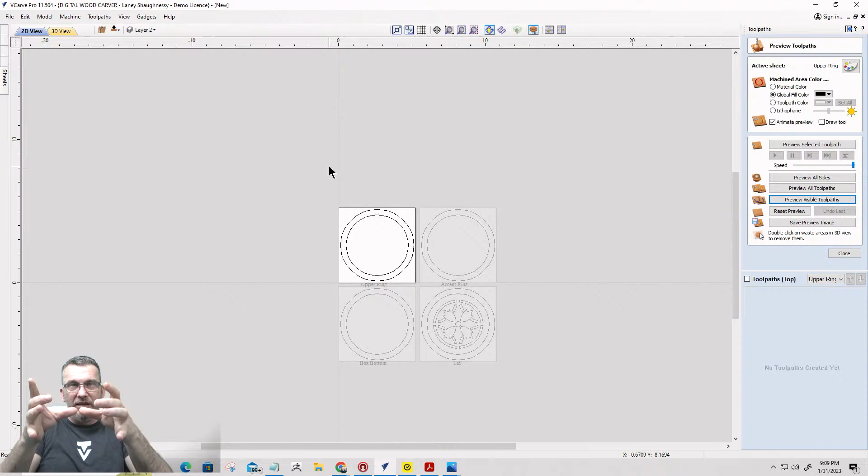We'll get the inlay done here in just a second. Let's go back to our upper ring because we got some other additional vectors to draw. Now on the fitted lid - gosh, I wish I had a sample to show you, to hold in my hand - our lid is going to have the outside ring. I am going to do a slight pocket on the inside, not deep, just a slight recess. And that's going to fit that outside ring over a lip on that upper ring, right?

So my inside wall, while it is 3/8 of an inch on that lid - that inside wall, that's not the outside lip, right? So of that, you'll see in a minute when we create the toolpath, from my outside cut I'm going to come in. I can go either direction, right? Which way do I want to go? Basically on the upper part of the cut, how much of my lid - I'll use my soda can for a second here - is fitting over the lip on the base, right? How much, how deep, and everything. My lid is 3/4 of an inch thick.

So I'm going to go on my lip - I want it to be not too small, but I believe I'm going to go about 3/8, right? 3/8, a little more than 1/4. So that's going to be how deep the pocket is. That has nothing to do with the vector I'm about to draw right now - that's how deep the pocket is on the toolpath. But how wide, how thick is that little wall on the upper part, that 1/2 inch, because my 3/8 inch walls are going to be the main ring, and it's only a 1/2 inch thick ring. So on that top 1/4 inch portion, how thick is that wall from the inside to the outside where the box fits on there? And since this is 3/8, I'm going to go half of it, 3/16.

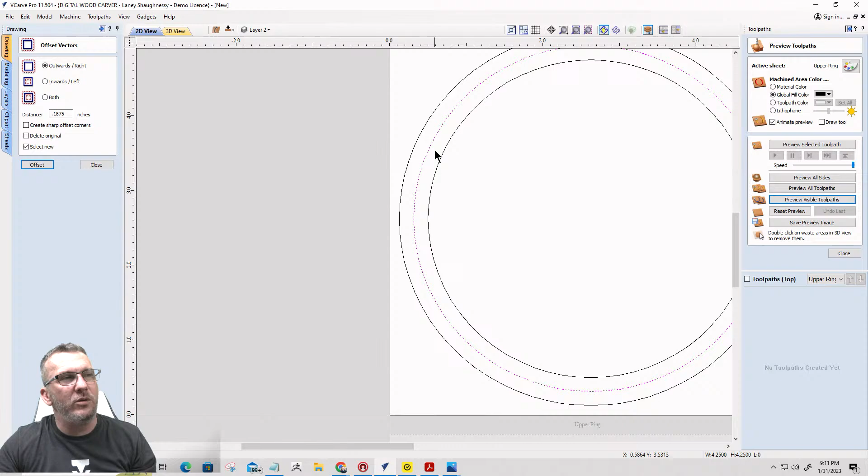My lip on the outside is going to be 3/16 inch, and this is going to be 3/16 minus a few thousandths of an inch because we have to get it to fit together. But when we do our pocket cut, let me offset this one outward 20 thousandths of an inch, 0.02.

We're going to take this inside vector that I just created and this most outside vector, and create a pocket cut. Now remember, this upper ring is only a 1/2 inch thick, so I'm going to go 1/4 inch deep, and I'm going to calculate that. First of all, got to make sure you use the right size bit so it'll fit, and a 1/4 inch bit won't fit in that space.

So I'm going to use an 1/8 inch end mill. The 1/8 inch end mill I use is a speed tool, the extra long one with a 1 inch cutting flute, upcut, two flute. This is my lip pocket, we'll call it that, I don't know if that's the right term, but it's a 0.125 end mill.

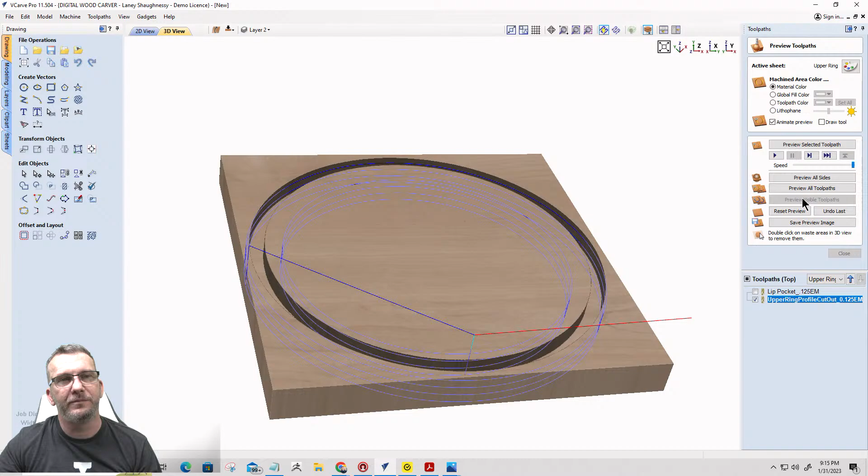And I'm going to calculate that, so that way I don't have to do a bit change on this particular piece. And again, remember, it does an inside cut on the inside vector, outside cut on the outside vector. And when we do the preview of the toolpath, okay, now that is going to be my upper ring, and that little lip, that's what the lid fits around.

Now, I have not done any allowances yet. Allowance means that when I use the same vectors to cut the lid out, if I don't give some kind of allowance, then the parts are going to be exact, and they're not going to fit together. I've got to make one a little bit smaller, or open up one a little bit wider, one or the other. I either need to do it on this ring or on the lid, depending on what it is.

Since it's going to be kind of the pocket, I'm going to use the allowance on the lid, not this ring. So I'm not going to do an allowance on the ring, I'm going to leave it as is, and I'm just going to do the allowance on the lid. You'll see it in just a second when we create the toolpath. It's going to be a small allowance, like 0.02, 0.002, just to overcut it, oversize that whole opening just a little bit so it's a nice friction fit. And I'm going to start with a very small number because I'd like to be able to sneak up on the fit.

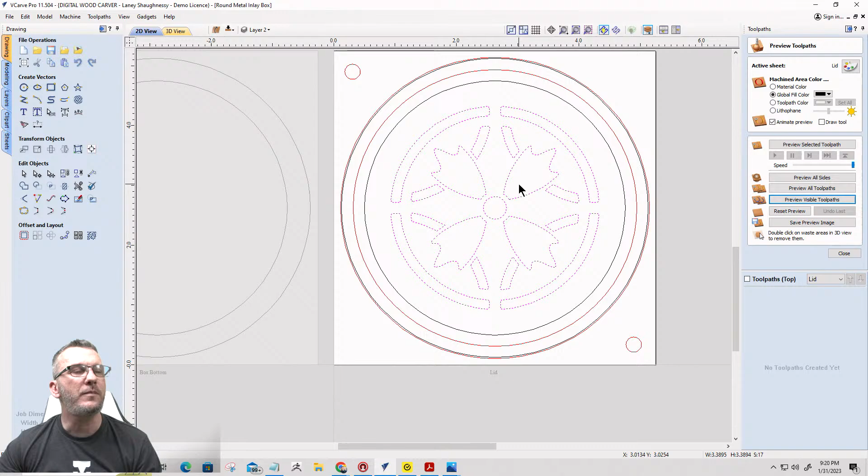I'm going to do all of it with the same metal. If I was doing different metals, then it would be two separate toolpaths, but this vector is going to be used to cut the male and the female.

I have yet to create the sheet for this to get cut out on, as far as the board and stuff, because I got to create the toolpaths for the male cut. Before I copy this over into a new sheet, I want to go through and clean up things, make sure everything is tight and right the way I want it. We'll go from there.

Now, the fillets that never got put into this — when I did that offset trim on these parts here, these inside corners didn't get their fillet. So I want to put the fillets on those parts really quickly. Those inside corners got trimmed.

Keep in mind, one of the reasons why at the beginning of the video I was playing around with the fillet size — 16th, and I was like whoa wait, 1/8 of an inch — and ended up on 32nd. Well, a 32nd is the radius of the 16th inch end mill I'm going to be using, so those inlay pockets and everything, that's kind of what I want to work with.

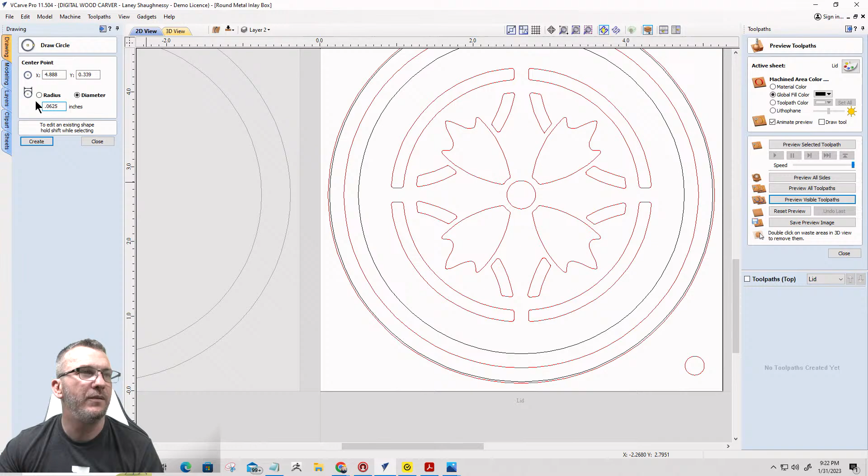My 0.0625 diameter cutter should be able to get in there. Did I make it not wide enough? Okay, so that inlay, the bit's not going to be able to get up in there. So I have a choice.

I'm going to be using the inlay toolpath. Whatever it cuts for the pocket, it will match the cut when I do the male inlay - it'll match the cut identically for the male. So because the bit can't fit in there, I don't necessarily have to change my vectors, because the toolpath will only create what it can carve.

Whatever cut it makes for the female pocket, it's going to make the same cut but on the outer perimeter for the male, and it's going to match it up so the parts fit. Because the male is cutting on the outside of the line, the female is cutting on the inside of the pocket. It will have that male cut the same path as the female where it could reach, so I don't necessarily have to correct or change my vectors.

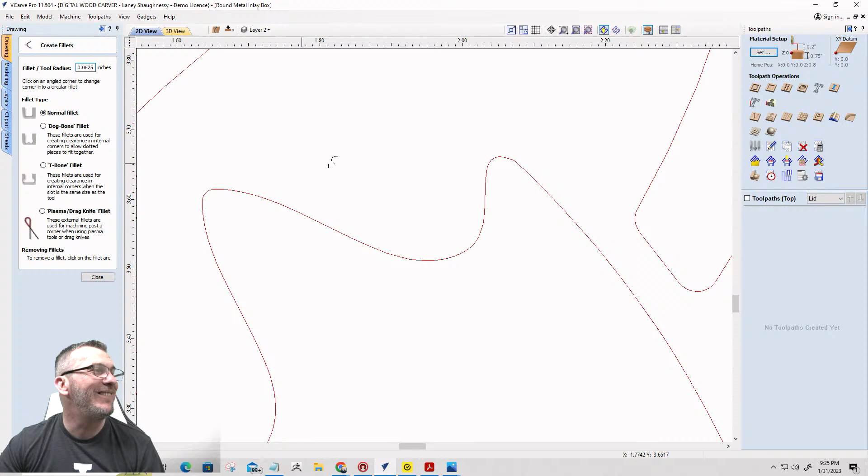I don't think it'll let me do what I'm about to try to do. No, it's not going to let me do what I want to do. I thought it was going to let me, but it won't let me do what I want to do. All right, so here's what I'm going to do.

Okay, just quick and simple, quick and dirty. I'm going to take my bit here. I'm going to bring it up here. Bear with me now, bear with me.

I'm going to take a straight line right down the center. I'm going to take that line, copy it with Control C, paste with Control V. That copy that's selected, I'm going to hit the number 0 key once. I've got to get everything centered because remember my line, I didn't draw it the right length and all, that's why it looks off. You're like, whoa, he's way off.

I'm not way off. But I'm going to take this and go sideways with it. Bear with me a second here. I'm going to align it up and down on the center of my material - this one's already centered left to right. I'm going to select both of these guys and hit the number 0 key one time to do that 45-degree turn.

And of course I'm rotating off the wrong pivot point now. Let's go to the rotate tool, use the center of the part. Come on now.

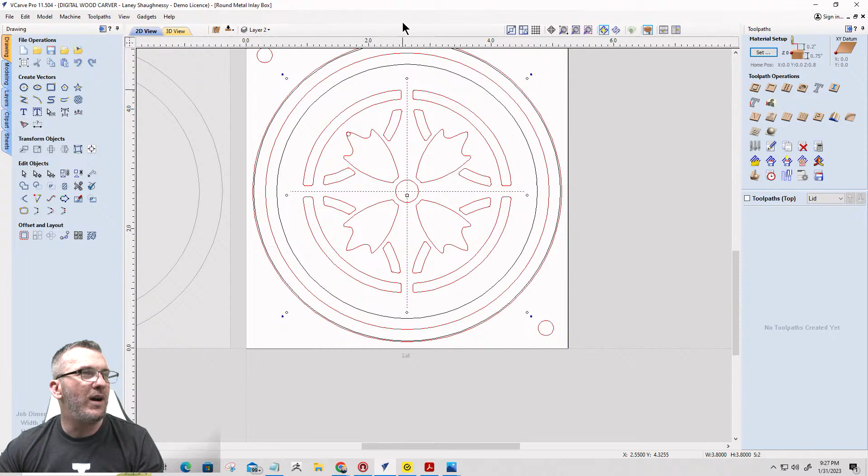...because this piece needs to be centered up and down. There we go. This one, left to right. Beautiful. Okay, now when I select those, my center better darn well be centered. It was off because my line, the length of it and all that stuff, and I had it crooked.

Okay, anyway, sorry. I'm going to hit the number 0 key one time. What this does is I'm at the center of that arc there, right? And this gets me a center point that I can snap my circle to, because I have smart snapping and geometry snapping on and all that.

What I want is I'm going to basically be trimming. Let me go here. And stay there.

Give me just a second, I'm kind of being a baby about it. All right, I'm going to bump that up there.

What that should do is—and I'll hit undo on this—but that should let me just come in here and trim this away, and trim this away, to recreate that shape. But before I do that, let me put that back.

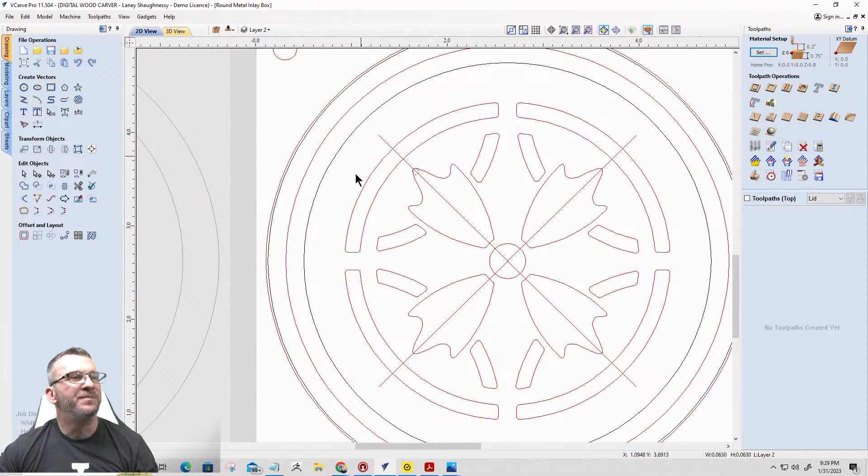Before I do that, I want to take this circle that I just created and hold down the control key.

I don't have any magic angle for this line, so I'm just going to pick a spot for it. Bear with me a second, you'll see what I'm about to do here. I'm changing the shape of my flower here for a minute, so this is on the fly.

I'll work with that. Now I'm going to take that circle right there, hold down the shift key, select this line, and flip it using the mirror tool. Create a mirror copy, flip about the line to flip it over there.

Bear with me. Now I'm going to take all 3 of those circles and rotate them using the circular copy tool around the center of my board, that center point, 4 times around. I'm going to copy those around to the other 4 parts.

Okay, now Big Fish is saying, no, no, no, no, wait, hold on. What kind of glue is used to hold the inserts to the lid?

So the inlays in the lid, you're going to use either hide glue when you're doing the inlay, or CA glue—cyanoacrylate, something like that. CA glue is great for that metal inlay into the wood. It's a great bond. You need to sand the metal that's going to get glue on it, to scuff it up a little bit so it has some teeth, for a nice glue bond.

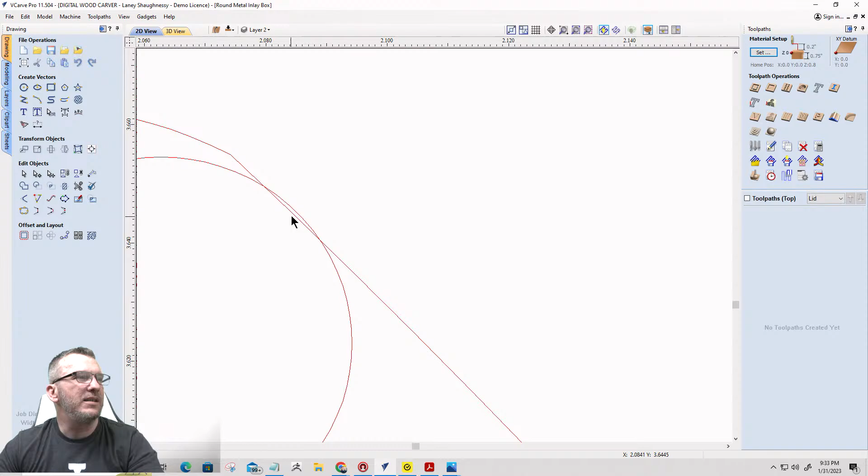Slightly a little bit of an indentation there, but I'm not going to argue with it. Over here, I'll have to—that overlap right there, that's what that little trim is. So I just got to remember to trim the inside line so it's consistent all the way around. So I'm just going to trim that, and then come in and trim the inside line and the inside line. When I close the tool, it should pull those lines together.

Okay, so very quickly, I'm going to work my way around, zoom in, inside line, inside line. I got the box checked to rejoin when the form is closed, so it'll join those lines together when the form is closed. So I'm going to come over here and trim, zoom in on the side ones, trim that inside line. I know you're all cringing, but we're going to close that off, and that'll close them up.

Not much of a little jag there, you can barely see that. Come in here, scissors, we're going to trim. It's consistent all the way around if it's one or the other. I could have, if I would have spent a little bit more time on it, lined up on my tangents of the circle, and it would have been just a simple trim like that.

But I was slightly off. Go in, keep it consistent, inside line there.

When you close the tool, it'll pull those corners together. One more. Then we got to move on because it's already 9:34. This project shouldn't have taken that long. It's a very simple little box. I think I talked too much.

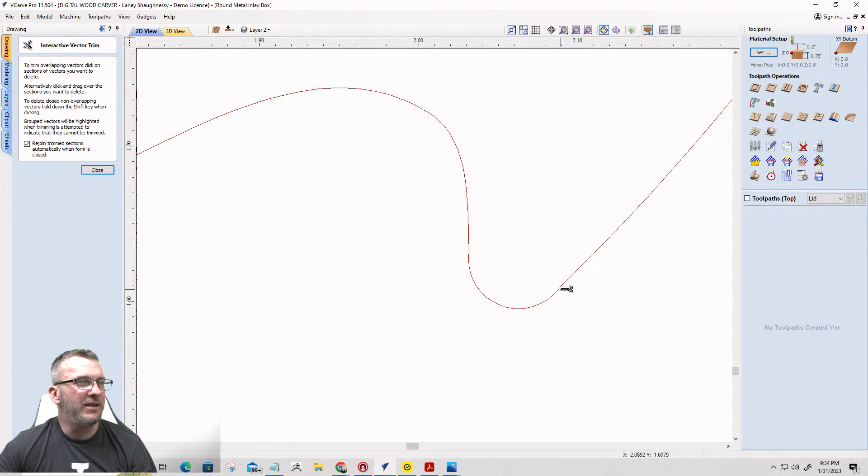Is that what it is? All right, so let's go there and then trim, zoom in, get yourself zoomed in there, and straight line. Do it the same on the other side, and that'll pull those lines together, so that'll close that up. Now I've got kind of little fillets that my router bit can fit into. All that happy jazz, everything is good, we're golden. Okay, let's create the inlay.

Now, if I was doing two separate inlays, I'd select the vectors for the one metal, like if I was going to do silver and brass or this or that, but I'm doing all silver. It's going to be the most expensive box lid around. All right, so we're going to do an inlay toolpath, always an inlay toolpath, so that it creates the male and the female consistently for you.

All right, this is going to be the female pocket, and our part is the material thickness. It should be pretty consistent in thickness from the factory, but it's metal and metal pressing and stuff, it might vary some. But that 22 gauge is going to be around 28 thousandths of an inch, 0.028.

And so it's not like a wood inlay where we're gonna press in that inlay and have a little bit sticking up, then sanding it down to be flush with the wood, right?

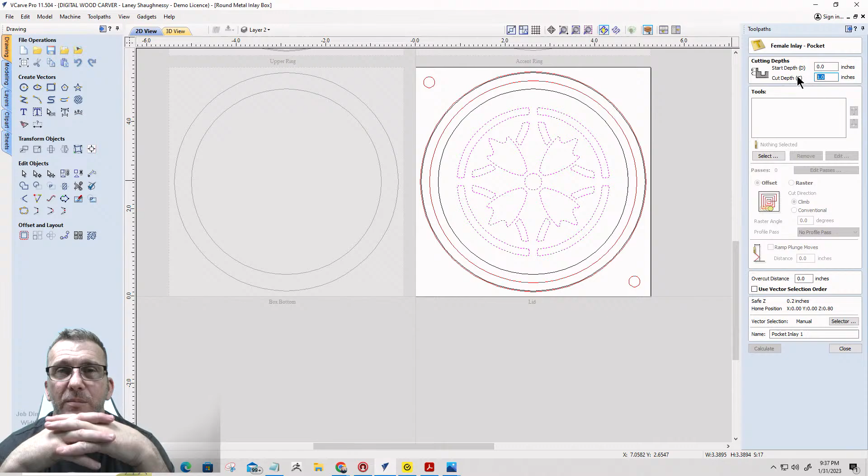And so on the inlay pocket, I'm inclined, and this is why I wish the metal would have come so I could do these cuts. And I'd like to, when I come back from Atlanta, I'd like to actually be in the shop and do some cutting on one of the sheets and stuff. That would be cool.

But the pocket, I'm gonna just probably go 5 thousandths of an inch deeper. So 0.0285, and that way I could sand my lid, because I got to sand my lid and clean it up anyway, and that would bring it down to the metal.

Or I could have my lid completely sanded and everything and just put the inlay in. But I'm gonna be polishing that metal anyhow. Sometimes people don't want to sand, but I'm using a fine grit, not 120 or anything like that. Some people don't want to sand the metals because it leaves marks and it doesn't have that actual finish, but there's going to be some cleanup required.

So I'm going to go 0.0285, and if my metal would have come in, I would have actually cut this and had a little bit more exact, here's what I did kind of thing. But I'm just gonna go 5 thousandths, a little more than a human hair, deeper on the cut, and this is gonna be the inlay.

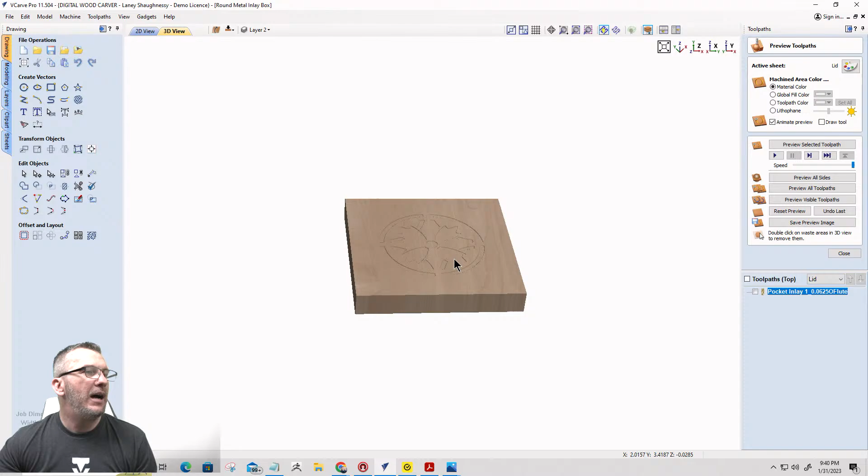Now I need to take that and copy it to a new sheet, but I need to create the sheet first. Sheet, add new. This is going to be my silver sheet, it's going to be 6 by 6.

I'll caliper it and everything, but I'm just going to go with what the jewelry manufacturer says for now - 0.028, 0.028. Click OK.

Now, this cut is not an inlay, not like a V-carve inlay where we have to mirror the part for it to fit. We just need to copy the part over. We don't have to mirror it or invert it or anything like that.

You guys and girls still with me?

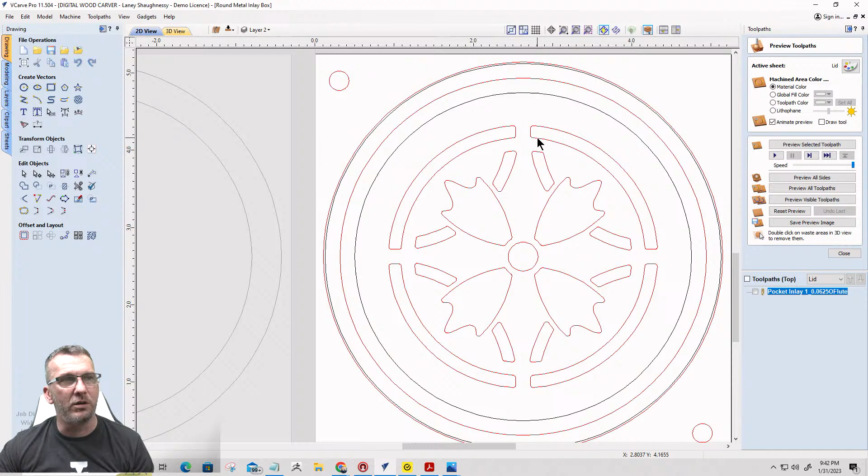Yeah, Keith Painter, you're right? Why draw what you can copy? Why go through and fix all 4 when you could just fix one and recopy all 4 of them? That could have been done, right? My mind was not 100% on that. So yes, I could have just fixed one, deleted the other 3, and recopied them around. Why draw what you can copy? Why waste time? Keith Painter, 100% correct. I could have done that. Absolutely, without a doubt. Work smarter, not harder, right? Okay, I just wasn't thinking at the time.

All right, let's select that and let's copy that to our sheet.

Now, before we go over and create the metal inlay, let's finish up this sheet here. So the only thing happening on the top is the inlay, and we're going to do the inlay on the top, then profile cut half the material down, and do the alignment pin holes.

Let's start with the alignment pin holes here - it's going to be a drilling operation for me. We're going to be cutting this 3/8 of an inch deep, using a 1/4 inch end mill, and I'm going to peck cut it. This is going to be my project board alignment hole, so I name it usually project board alignment holes or waste board alignment holes depending on which one it is. 0.25, and we'll calculate that. Okay, so that'll create those pinholes and everything.

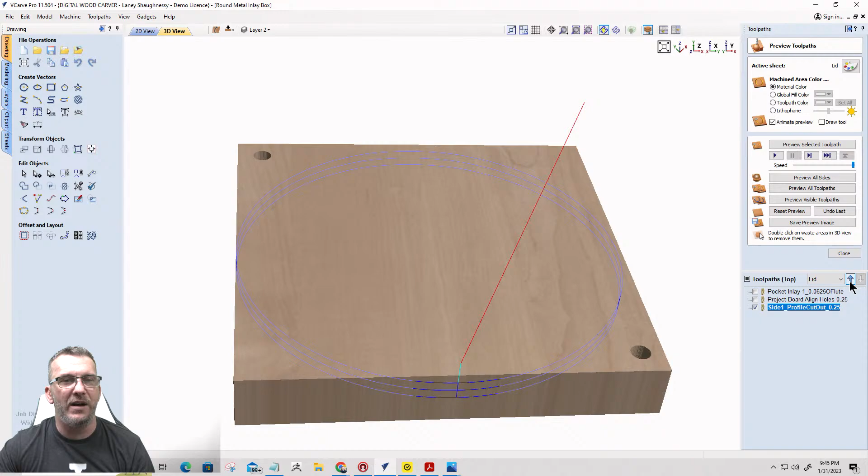The profile cut - not that one, that one - is going to be cutting halfway through on this side, halfway through on the other. Or I could just cut all the way through on one side, but I just like a little relief, so I'm going to cut halfway through on one side, halfway through on the other. So we're going to go 0.375, using a 1/4 inch end mill on the outside of the cut. This is side 1, profile cut out, 0.25, calculate. So the profile cut will be last, the alignment holes will be first, and then the inlay. So we'll have these 3 cuts for side 1, right?

Okay, just that. All right, cool. Now that's going to get flipped for me, it's going to flip on the y-axis. And here we're going to do the wasteboard alignment holes. These holes here, that's going to be a drilling operation, 1/4 of an inch deep - I drill 1/4 of an inch into the wasteboard, and I'm going to use pecking. This is my waste board alignment holes. Calculate.

And I don't need to preview those because they won't actually be showing up on the board. Now, my inside pocket - I just kind of want a little bit of relief on the inside pocket, a little bit of an opening, a little bit of headspace if you will. So that inside vector, I'm going to just do a pocket cut.

This is 3/4 of an inch thick. I've got an inlay, only 28 thousandths. I could go deep with the inside if I want and all that stuff, but I really just want to go about 3/16, 5/16, something like that - just a little bit of space and everything.

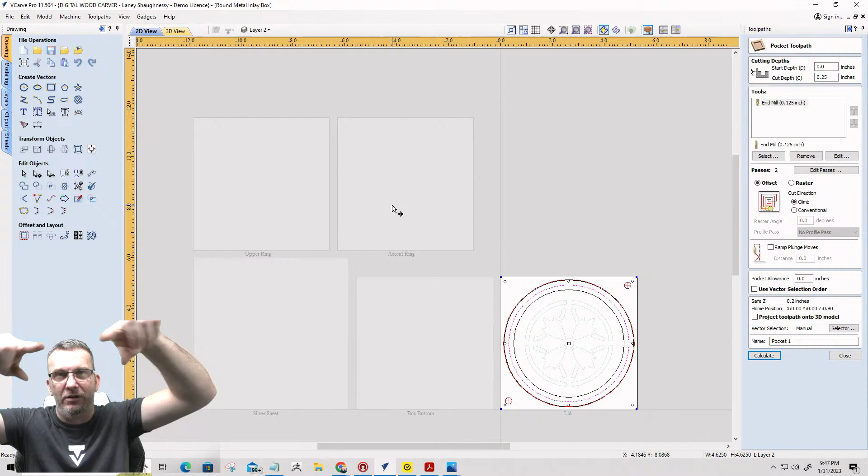That's going to be beyond the 1/4 inch cut, right? So you remember there's a lip that this lid gets cut on - that's going to be on this toolpath here. So from here, this cut is going to be cut 1/4 of an inch deep. That will correspond with the upper ring's 1/4 inch outer lip, if you recall. So that will be 1/4 inch deep. Now, I don't want it to bottom right out at 1/4, right?

I want to give myself a little bit of room, but I don't want to give myself a bunch of slop. So my pocket is going to be, maybe at the most, 0.27, just another 20 thousandths of an inch more. I could go 0.3 but that just gives a lot of room. I'm going to go like 0.27, 0.28, not too much more than that quarter of an inch.

And the bit that I'm going to use, because all of this is getting pocketed, right? So I'm going to use my quarter inch end mill. So remove that, go back here, quarter inch end mill.

Now, I haven't put the allowance in yet. Remember, if you're thinking 'hey, he didn't put the allowance in,' you're right. Those alignment holes won't be there, they'll be on the wasteboard.

But anyway, I'm going to cut this with a 2 thousandths allowance. Remember, it's cutting on both sides, so when it's offsetting 2 thousandths over here, it's offsetting 2 thousandths all the way around. So that's almost like 4 thousandths of an inch, and that's going to be my starting allowance. If I don't put an allowance on this, when that goes to fit on that lid, it's going to be a tight fit. So your allowance is always going to be a negative number.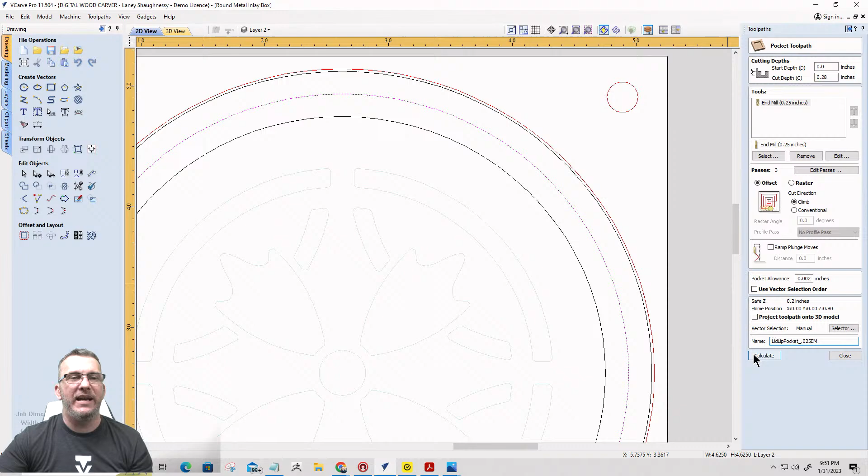So in our case, our allowance is going to be a negative number, negative 0.002. And this is going to be my lid pocket, lip pocket, 0.025 in mil. Alright, so when we calculate that, I'll show you in the 2D view here.

When we go into the 2D view, if I go into solid view and zoom in, it's going to be overcutting. Oh, not that much. It's going to be overcutting that 0.002 of an inch, super, super fine. But remember, it's doing it on both sides, all the way around, so it's opening that hole up all the way around, not just one side, both sides. So that's like 4 thousandths, if you will, if you doubled it. So that's going to be opening up all the way around, and we're good to go.

Okay, so that gets the allowance. The male pocket on the upper lip does not, right? The part sticking up. Okay, so we got that.

Now, my inside here, okay, let me turn this off. My inside vector, I want that to go deep. Now, I'm already at a quarter of an inch, but I want to go another, from that quarter, I want to go another, 3 or 5/16. So I've already pocketed out with this lid pocket here. So this inside vector is going to start at that 0.28. That's where it's starting. And it's going to cut another, in my case I want to go...

0.1875, 3/16. Do I want to go 3/16 or 5/16? I'm going to go another 5/16. This will be my lid center pocket. Lid center pocket, 0.025 in mil, 0.25 in mil. Calculate that.

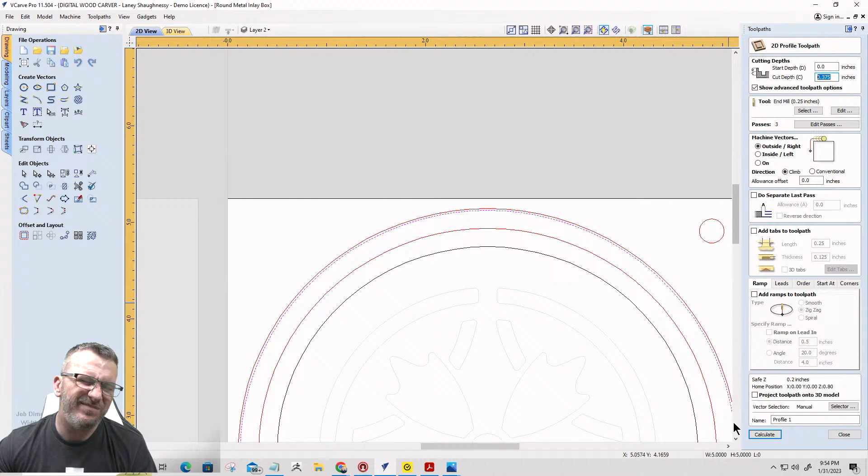We're going to be cutting 3/8 of an inch deep, because remember, we already cut halfway through on the other side. We're going to use our 1/4 inch end mill outside of the cut. And I've got double sided tape on this side as well too, right? So I'm not too stressed or concerned about glue residue on my inlay and all that stuff. It'll be fine. Acetone and all that stuff wipes right off.

But anyway, so this is going to be my lid profile cut. Lid outside profile cut. And I have no real naming convention for my toolpaths, I just name them what I know, so I know what they are, right? Calculate that, and that's going to be our profile cut to cut out. It's going to cut 3/8 of an inch deep. So you'll see the two tones there, where one's cutting halfway on one side, one's cutting halfway on the other side, and the software showing you that.

So this will be my lid, so that'll be the top. Now, it's not sexy enough for me, right? I want to round it over. I want a nice little round over on this side. So I want to soften those edges up a little bit. But on the inside, it's going to be fine. And if I wanted to put a little inscription in there, I could, you know, V-carve a shallow inscription or something like that for someone. Whatever the case may be. I could decide, you know, if I'm going to go big, go home. But I think this will be adequate enough for a nice little decorative inlay inside that walnut.

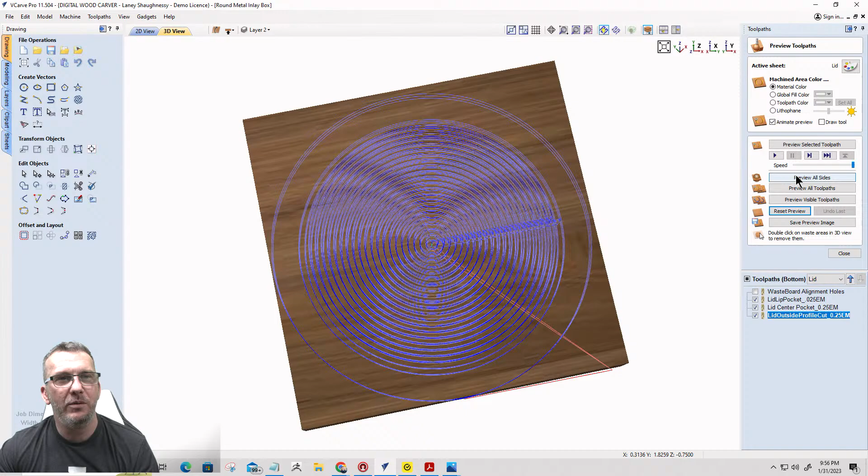It's going to be, you know... There's my walnut. Preview this, and this. Preview all sides. I was wondering where my walnut was for a minute there. It was a little bit of a delay.

All right, so while that's cutting out, let's see what we got here.

Keith, yep. Yes. Did you want to go 0.005 deeper or 0.0005 deeper? Can you personalize the inside lid with a V carving? Yes, I can go personalize the lid with the V carving, Big Daddy. And Ed, did I want to go 0.005 or did I want to go— I did not. 0.0005 is 5/10,000ths of an inch. I want to go 0.0285. I wanted to go— I did go. Don't confuse me, Ed. I did go 0.0. Let's go to the inlay.

Let's go to the inlay side one. Let me flip back over to side one. And I might have said the word 5/1000ths of an inch when I was describing it, but the actual toolpath, I went 5/10,000ths of an inch, right? So 0.0005 is what I added to that 0.028. If I would have added 5/1000ths of an inch, which I did say verbally, I know that now. If I would have added that, then that would have changed my cut depth dramatically. It would have changed it to 0.033, and that would have been a little bit much. But I literally just want a small amount, 5/10,000ths of an inch. It's insignificant, it seems like, but it's not.

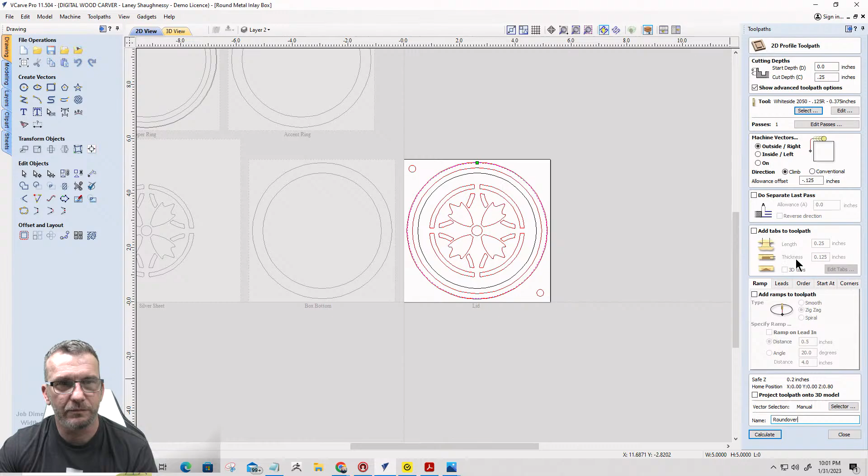I don't know, oh I do want to do the round over, so bear with me a second. After the alignment holes, I want to do the pocket inlay, and do that halfway cut through on the first half. Then I want to do a profile cut, a quarter of an inch deep. I want to use the Whiteside 2050 round over bit, an eighth inch radius round over bit. I want to cut on the outside right of the line, with a pocket allowance offset of negative 0.125 - that's the step over for the 2050 round over bit, eighth inch radius - and round that over, calculate that, and preview that visible toolpath to give that lid just a little round over.

Now, if I wanted to get more funky or technical with it, I could do a little ogee round over and all that stuff. I just got to remember how much meat I have here, right? So I don't want to get too deep into it, just make sure I got enough meat. But just a nice little round over or something, and I could go from there.

Now, how would a slight dome affect the inlay? Well, the metal is pliable, right? It's getting glued in with the CA glue and everything, so the metal's pliable. As long as it's not too dramatic, because we don't want to kink the metal in any way.

It's 28 thousandths of an inch, and it's pliable. We just don't want it being too kinked or too dramatic, we don't want to put too much surface tension on it. The CA glue should hold it into place, but it's a soft metal - a dead soft metal - which makes it easy to cut. It's very pliable, very workable. I mean, they shape it into rings, right? This is the same metal you get shaped into rings and necklaces and jewelry. So if you decided to go with a slight dome, that wouldn't be a problem.

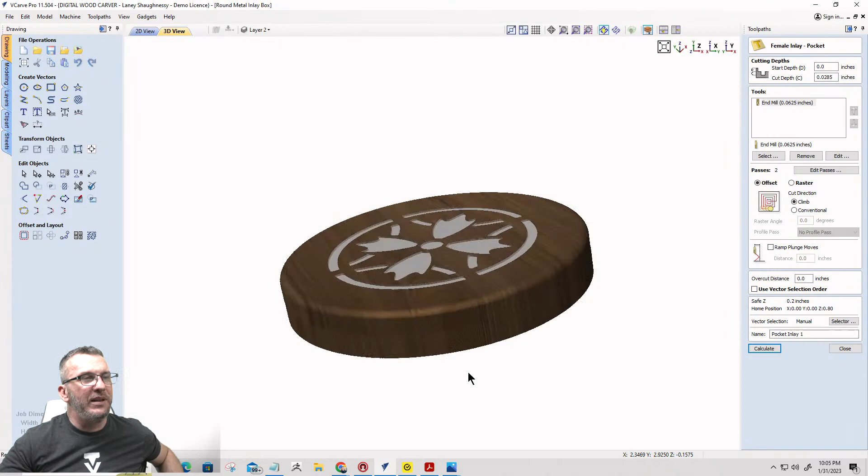With that, that's going to kind of complete our box. Everything gets glued together - your three layers, your base is the bottom pocket, the accent ring gets glued to that, upper ring gets glued to that, and then your lid fits onto that stuff.

But I think really quickly, I'm going to take this object here, hold down the shift key, and scale it up a little bit. I'm going to go over and make this sheet active for a second, the silver inlay. It's going to be an expensive box for sure. Delete that, come back over here.

Right click, copy to sheet, silver sheet.

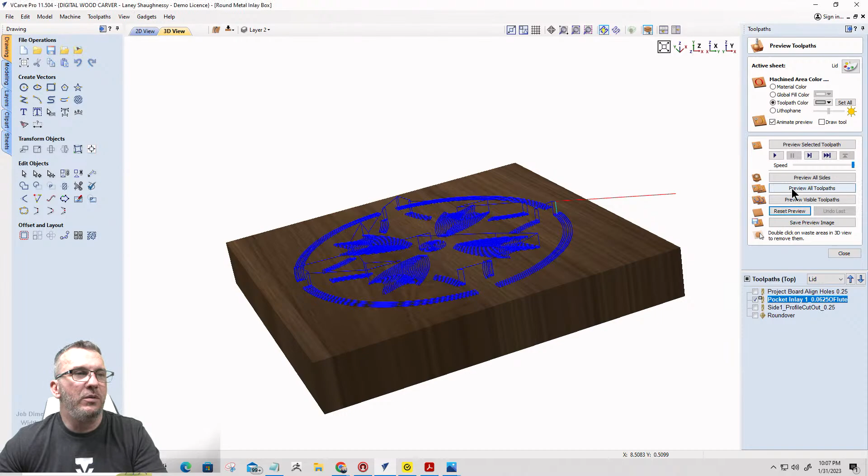All right, let's go back into the inlay tool really quickly. The inlay toolpath that was created already - the vectors, all I did was scale them up, so they're still selected, so I'm just going to recalculate that. All right, reset that preview, and preview all the toolpaths.

Yeah, I think that looks more appropriate for the lid. The other one was just a little bit too small. And I did get a 6 inch by 6 inch sheet, so I have plenty of room there, because that inlay is only 4 1/4, a little under 4 1/4 by 4 1/4.

Okay, last thing, come over here into our silver sheet. Get this centered - not centered, sorry - get this positioned in a way that I can minimize my waste and maximize my yield, right?

Now these parts are getting cut out, right? All these little parts are getting cut out. They're going to still be glued to the MDF backer board when it gets cut and everything, until I separate it, until I soak it in water and separate it all. Now I'm almost wanting to nest this to minimize my waste and maximize my yield on this

part because of the cost of the sheet and everything. But at the same time, these parts should all be consistent, right? They are copies of each other. They should be consistent, so I should have no fear of breaking this up and nesting it to minimize my waste. Or I could just cut it out as is, right?

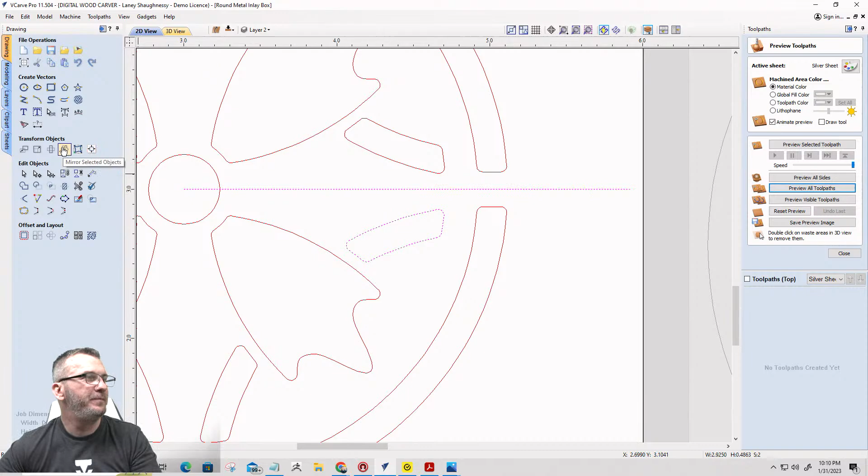I'm going to take this part right here. I'm going to select that line right there, and I'm going to flip it about that line. I'm going to create a mirrored copy - actually, no, I'm not going to create a mirrored copy, I'm just going to flip it about that line. And it should land close, right? Not exact, but close - should have landed somewhere close.

But let me see here. It gets me in the right orientation, at least. If I drag that up and kind of snap that in, they're not the same, right? So undo that.

Now that piece and this piece should be the same. This piece and this piece should be the same. So let me take this piece.

I'm going to put everything back - Control Z is your best friend in this little scenario. I'm going to drag the pivot point down to this corner here, and I'm going to pivot this bad boy around here. And I was off on my pivot a little bit, but I was close enough. All right.

Let me pivot that some more. Okay, so those two parts fit, right? So this part fits with this part, fits with that part, so on and so forth.

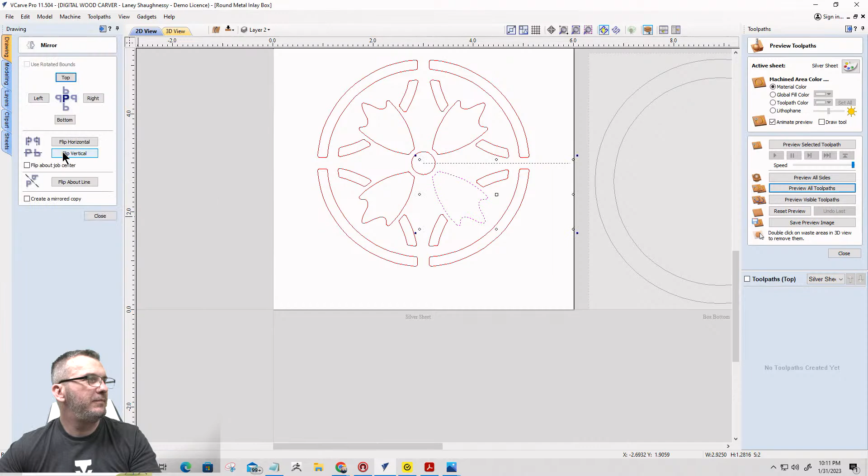And let me undo everything here. Let me take this and this line, flip it about that line. Okay, and that lands - that lays out perfectly there.

Okay, so it wouldn't be too hard to get the fitting pieces in the fitting parts, right? Because it's just every other piece - this piece will fit in that hole, that piece will fit in that hole, that kind of thing. It's not like I'm doing a big major project, it's just this. So knowing that and everything, I could take my parts and nest them.

I'm going to be using a 1/16 of an inch end mill, and somebody might be like, 'Man, I'm not even going to deal with that,' right? But they're consistent somewhat, so the clearance - I can keep my clearances tight because of the simple fact they're all glued down, right? They're glued down to that MDF backer. They're not free floating and flying everywhere and all that good stuff, right? It's glued down, so when it cuts out, it's still going to be attached to the backer board.

So I can go on my clearance - I can go a 1/16 of an inch. And my edge, I'll stay away from the edge a little bit.

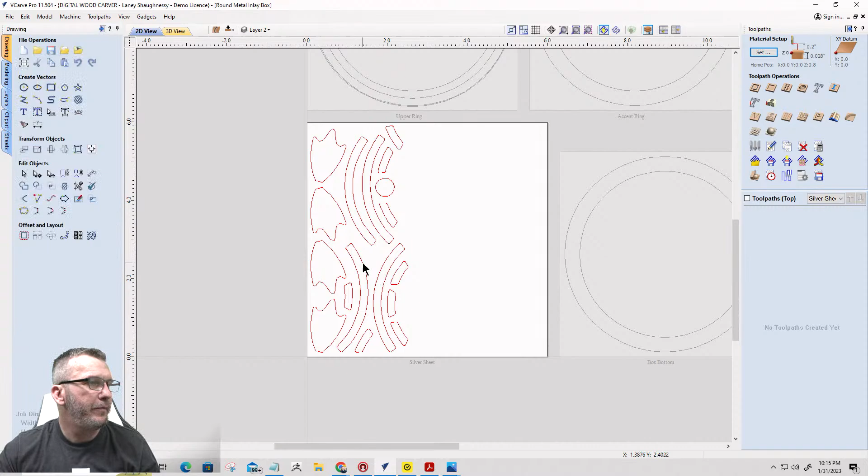All right, so let's click preview. Okay. All right, let's select all this, or first of all, let's select all duplicate vectors. Make sure there's none. Wonderful.

Okay, let's go ahead and profile cut. Cutting 0.028 -- you can go a little bit more if you want, but I'm going to go 0.028. I'm going to be using my 1/16 of an inch O-flute bit. That metal cut is going to be 35 inches per minute, 18,000 RPMs, 32nd of an inch, and I'm going to go with a plunge rate of 7 inches per minute.

This is going to be my inlay. Select. And the great thing about this is you always want to use the same bit to cut your inlay male parts as your female parts. Because I'm using the ZRN coated bit or the upcut two-flute bit, either one, they both will cut wood. Because the O-flute bit is ZRN coated, it can cut wood and other metals and materials and all. So can the two-flute upcut bit. So I'm covered either way. I don't have to use one bit for one thing, one bit for another. I can use the same bit for both cuts.

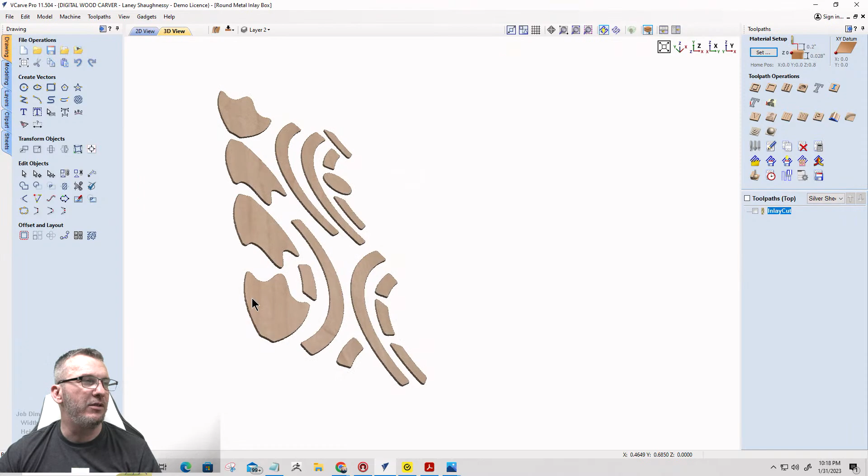They're all going to get sanded anyway, but I could take my diamond bit and number them 1, 2, 3, 4, 5, 6, 7, 8, that kind of thing. And etch it on there like an actual small little miniature number or a little mark or something to identify it.

I could do that to identify the parts and all. But I have 4 parts that are the same on those smaller ones, and the other 4 parts are the same, so I just have to match those up with their holes. So one's a little bit longer than the other. So there's 4 holes that are longer and 4 holes that are shorter, and then everything else fits together -- fits right into one or the other.

But I could etch a little number in there, and that could be the bottom side that gets glued in the inlay. You never see it. I could label it somehow or another. I could mark it and everything, but I'd have to mark it before I unnested it, right? So I'd have to write the vector in there, what the part is, and then group those pieces together and then nest it so it groups together with the appropriate number, right? So yes, there's a lot of ways that you could approach that.

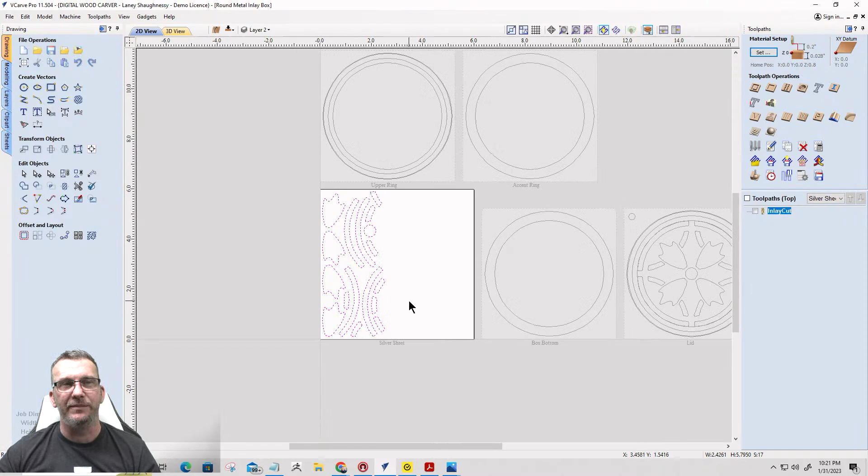But I'm a big fan of minimizing waste, and that gives me a whole half a sheet to do something else on, and that makes me happy, right? And it makes my box less expensive, literally, because I can use that other piece for something else.

So for this part, we have a 1/2-inch sheet or 1/2-inch piece of material for our upper ring, and a 1/4-inch piece of material for our accent ring. Now if you don't have ways to surface or plane these down to these thicknesses of material and all that, use your CNC, right? I'm using double-sided tape, or a bandsaw if you have one, but you can use your CNC. So I have double-sided tape holding these, there's no clamps in the way, so I could surface down to a 1/4 of an inch thick material, 1/2-inch thick material, and that kind of thing.

On the accent ring, it's only a 6x6, hell you could even use a dovetail saw, or a pull saw, or a bandsaw. What if I didn't have a bandsaw? That 3/4 inch thick piece of material, if I didn't have a way of planing it down, I would at least want to kind of rip it in half because it's going to be 1/4 inch thick, right? I don't want to waste a 1/2 inch of material that I could use somewhere else on the walnut or whatever.

So I can mill it down and then flatten it out to 1/4, I could get it to the finished depth before I cut it out and things like that. There's a lot of ways to do it. Your CNC can be your planer, and if you don't have ways of getting your material down to the thickness you need, use your CNC. It's a profile cut surfacing toolpath, and you're good to go.

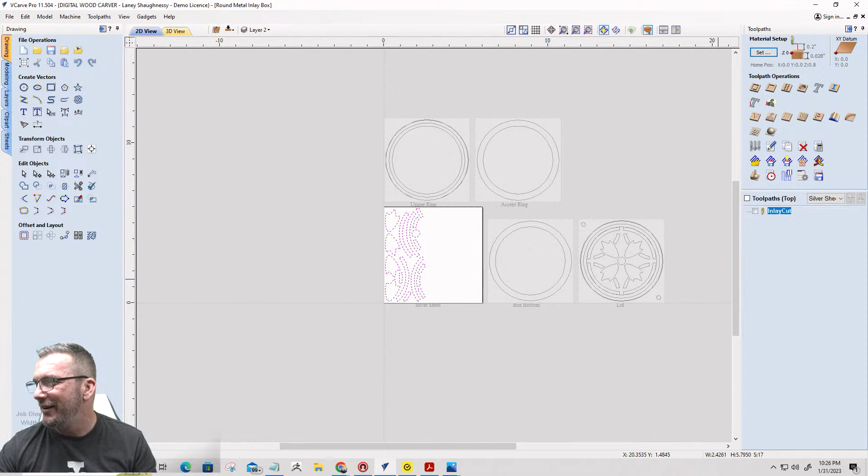Keith says, we wouldn't be in this predicament if we drew one and rotated. LOL, you're absolutely right.

All right, with that, we are done. Dun, dun, dun, dun. All right, that is it. So hopefully you like this toolpath.

Definitely check out episode 6. The video link is in the description of this video, episode 6 of Metal Inlays from Woodsmith, that CNC Base Camp. Listen to the video. He also shows his little box, and talks about the little box that he makes. It's a neat little finger box with a nice fitted lid kind of thing.

Gravity is what holds it on, along with the shape of the contours of the top and everything. Watch that video and see how he does his inlays, how he talks about his backer boards, hide glue, and all of that stuff. It's a great video, a great tutorial, and there are some good files provided to you.

Where are they at? Import, there we go. There's some good files provided to you, little patterns for inlays, some floral stuff, and this little box detail - a nice finger box and lid and everything.

It's 4 separate pieces that get glued together, finger joints and stuff. But watch the video, episode 6, link is in the description down below of this video, and definitely check it out.